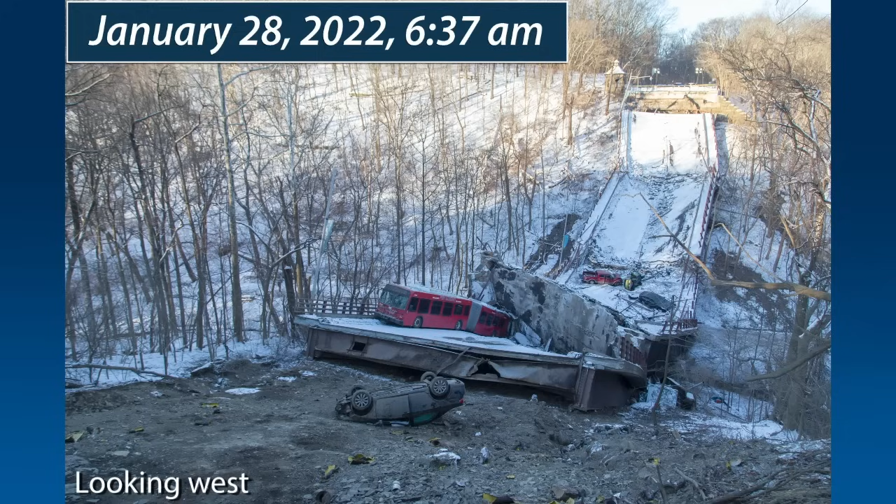On January 28, 2022, about 6:37 a.m. Eastern Standard Time, the Fern Hollow Bridge in Pittsburgh, Allegheny County, Pennsylvania, collapsed. At the time of the collapse, there were 4 passenger vehicles and an articulated bus on the bridge. A 5th passenger vehicle drove off the east bridge abutment after the collapse began and came to rest on its roof. 4 people were injured and there were no fatalities.

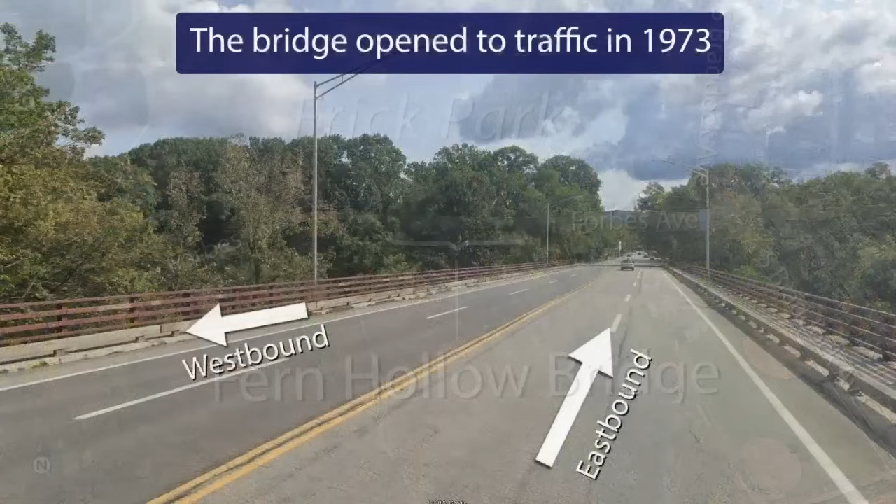The bridge, which was located about 5 miles east of downtown Pittsburgh, ran east and west and carried Forbes Avenue traffic over Frick Park. The bridge opened in 1973 with 2 lanes of traffic in each direction.

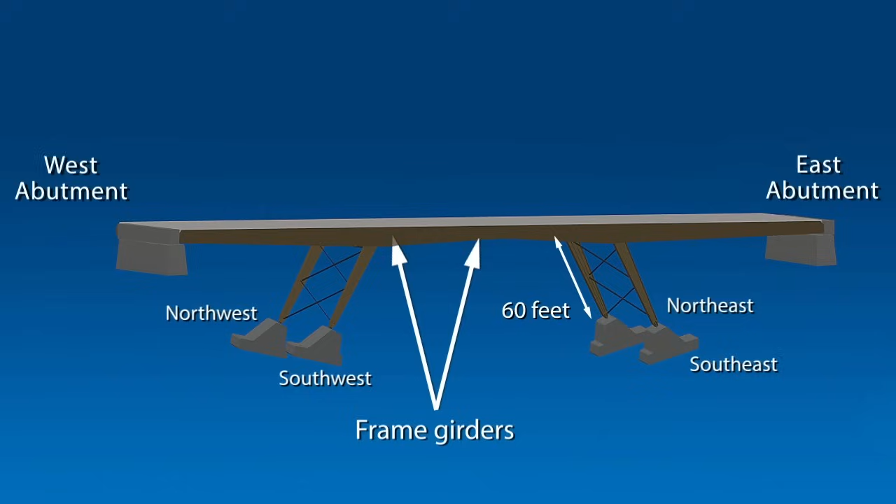The bridge was 447 feet long, and the main bridge structure consisted of 2 large girders, called frame girders, running east and west, supported by 4 rigidly connected legs, and abutments at the east and west ends. Each leg was about 60 feet long and oriented at an angle with respect to the frame girders. Each pair of adjacent legs were connected by cross bracing. This design is referred to as a K-frame due to the way the frame girders and legs form a shape similar to an elongated K when placed on its side.

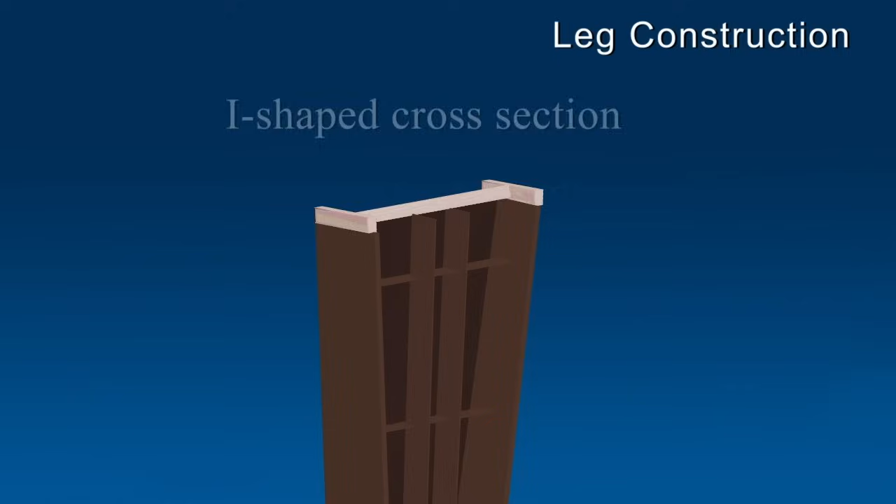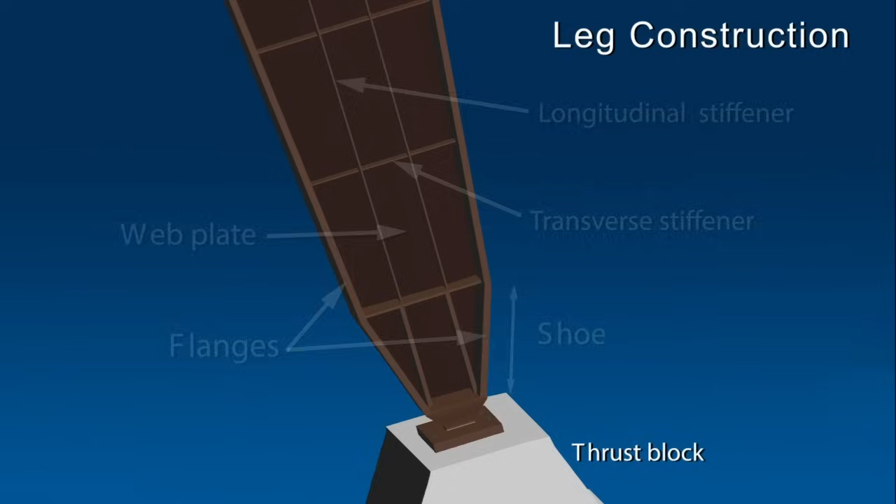Each leg was constructed of welded steel plates forming an I-shaped cross section. The 2 flanges were the main load-carrying parts of the leg. Each leg narrowed from top to bottom and then tapered to a shoe that rested on a reinforced concrete thrust block. On the inside of each leg, longitudinal and transverse stiffeners were welded to the web and flanges to resist buckling. The outward sides of the legs did not have these stiffeners, but, like the insides of the legs, included a transverse tie plate and longitudinal bearing stiffeners running the length of the shoe.

The tapered legs cause compression forces in the flanges to push outward. This outward push was resisted by the transverse tie plate and the web at the top of the shoe, which placed the transverse tie plates in tension. By design, the transverse tie plates were thicker than the transverse leg stiffeners to carry the forces at this critical location in the leg.

The bridge was constructed of uncoated weathering steel, an alloy designed to form a protective surface layer of rust called a patina. The patina develops over time through repeated wet-dry cycles. Because a properly formed patina resists corrosion, using this material eliminated the need for painting or coating.

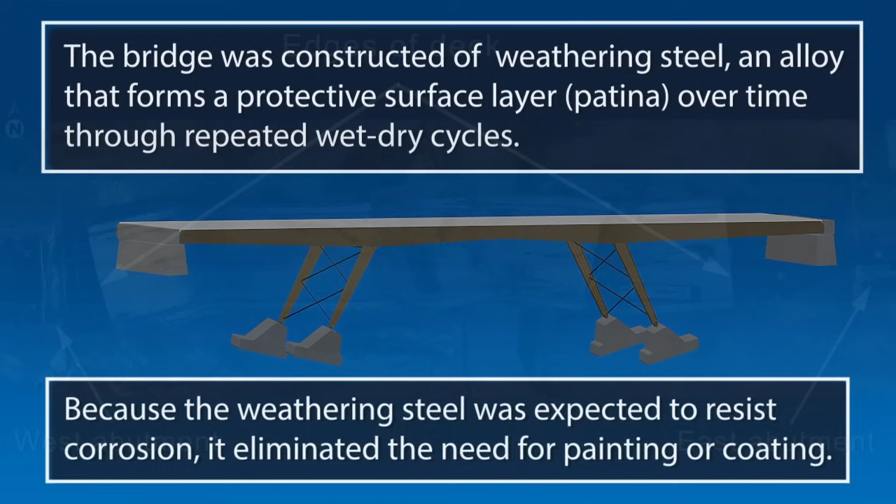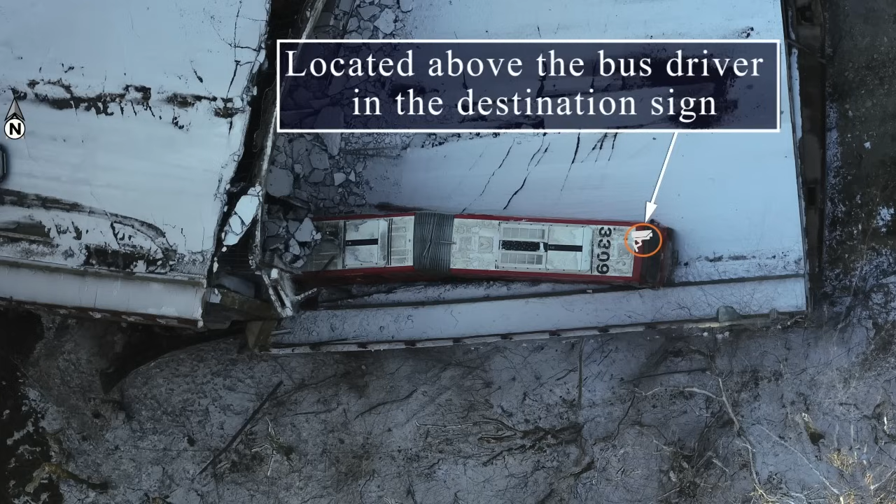This is an overhead view of the bridge taken shortly after it collapsed. A Port Authority articulated transit bus was traveling from west to east on the bridge prior to the collapse. It was equipped with video cameras, including one facing forward at the front of the bus and one facing rearward along the right side of the bus.

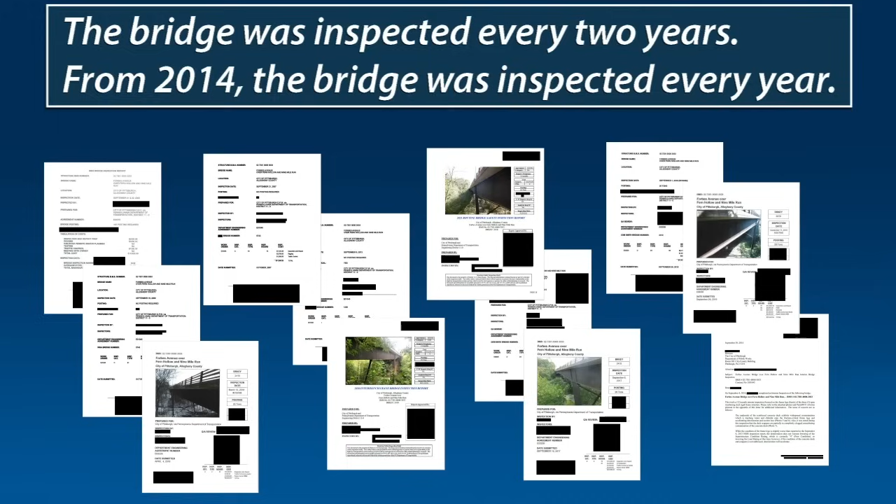The Fern Hollow Bridge was inspected every 2 years in compliance with the National Bridge Inspection Standards. Starting in 2014, the Pennsylvania Department of Transportation required the bridge be inspected every year due to its condition rating and 26-ton weight restriction, also known as a posted load limit.

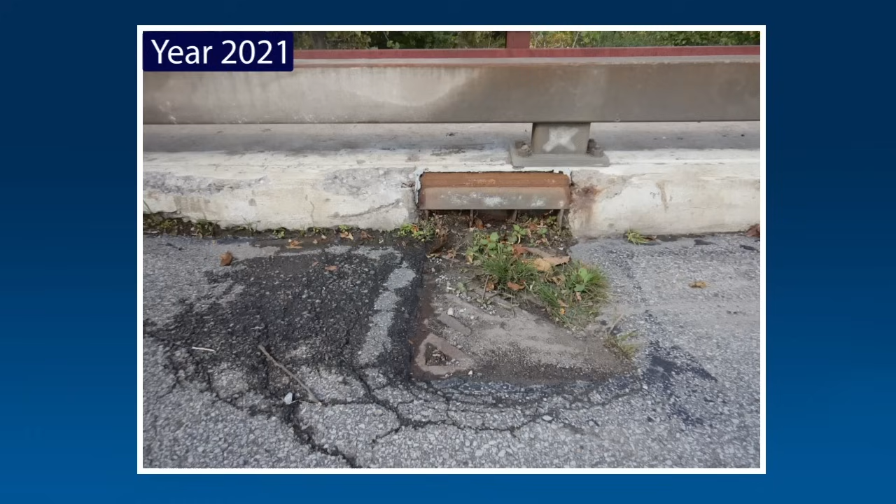Inspection reports over the years repeatedly documented clogged drains in areas where leaves or other debris collected, allowing water and road salts to run down the bridge legs and accumulate on the legs near the transverse tie plates. This accumulation of water and debris on the bridge legs prevented these areas from drying, which, in turn, prevented the protective patina from forming on the uncoated weathering steel.

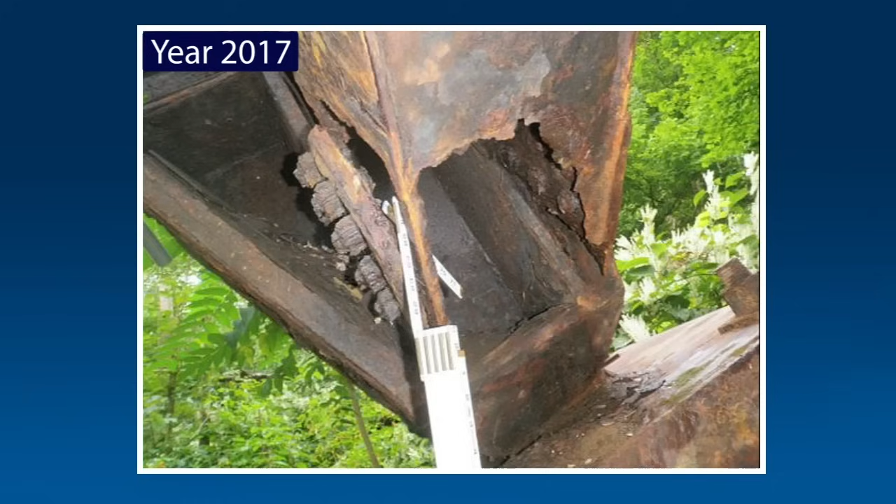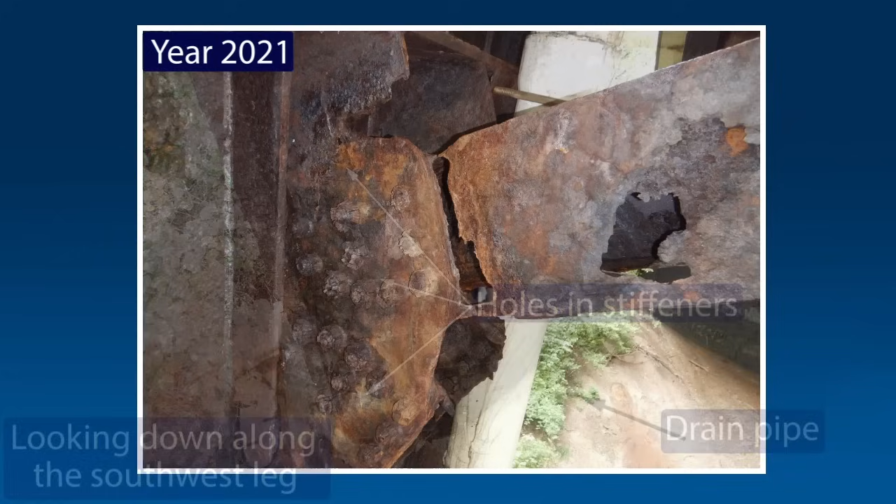This lack of patina and a continued accumulation of water and debris ultimately led to extensive corrosion damage and loss of material, or section loss, on critical areas of the bridge legs, including the transverse tie plates. The inspection reports documented some of this section loss, which progressed to the point that there was thinning of and holes through numerous structural elements on all 4 legs.

In 2009, due to corrosion of the leg's cross-bracing, steel cables were added to both sides of the bridge legs, connecting the top of one leg with the bottom of the other leg, forming an X. The cables were intended to be a temporary measure until the rigid cross-bracing could be replaced with new cross-bracing of the same kind. This was never completed.

Similarly, a rust-inhibiting coating was to be applied to the bridge legs and lower bracing members, but this was also not completed.

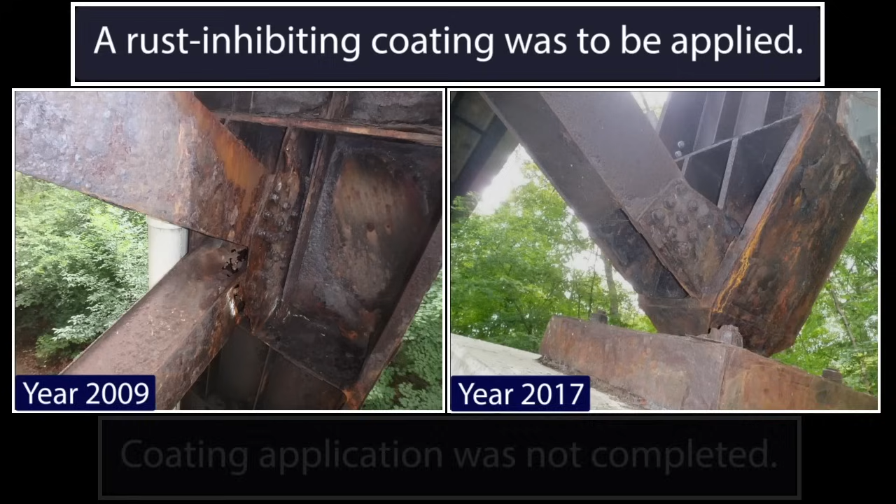Post-collapse examination revealed that while all 4 legs sustained damage, the southwest leg sustained the most damage, including significant fracturing and deformation. On the southwest leg, both the web and transverse tie plate were severely corroded. The thickness of the transverse tie plate was substantially reduced near the hole in the web.

These 2 images, taken from inspection reports, show the same hole in the southwest leg in 2013 and 2021. In 2021, the hole in the web above the tie plate was visibly larger than it was in 2013.

Following the collapse, 3-dimensional scanning was used to document section loss on the legs of the bridge. These scanned images confirmed the reduced thickness of the southwest leg and transverse tie plate as shown in the photos. The yellow areas indicate where the steel was only 25% of its original thickness.

During the collapse, the bottom flange, highlighted in blue, separated from the web and the transverse tie plate, and the flange curled back onto itself as shown here. The bottom of the leg also bent approximately 90 degrees, changing the orientation of the shoe. While these deformations are being shown separately for illustrative purposes, they would have occurred simultaneously during the collapse of the bridge.

At the time of the collapse, it was dark and the temperature was 26 degrees Fahrenheit with light snow. All injured occupants had been transported from the scene by 8:26 a.m. A 16-inch gas main was severed during the collapse, but no fire or explosion occurred. Staff believes the emergency response to have been timely and effective and has excluded it as a factor.

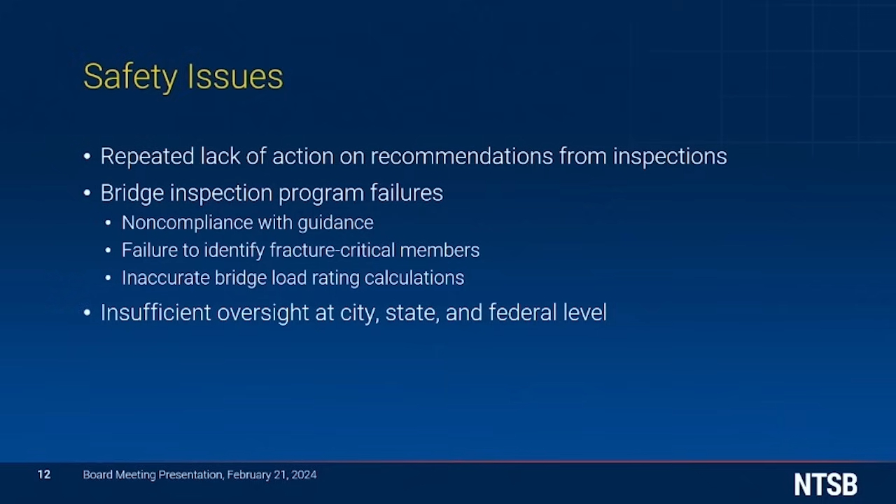Staff identified several safety issues during the investigation: the repeated lack of action on recommendations from the inspections of the Fern Hollow Bridge at multiple levels; failures in the bridge inspection program, which was non-compliant with federal and industry guidance, did not identify all the fracture-critical members of the Fern Hollow Bridge, as well as producing inaccurate load calculations. And finally, insufficient oversight of the bridge inspection program at the city, state, and federal level.

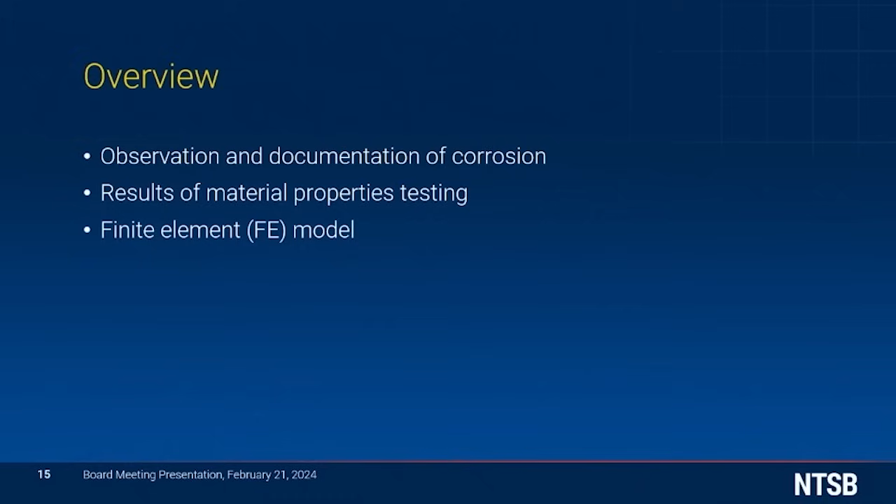In my presentation today, I will review the corrosion observed on the bridge components post-collapse, the results of testing of the steel used in the construction of the bridge, and the conclusions drawn from finite element modeling of the bridge design.

The Fern Hollow Bridge was constructed from a grade of steel called uncoated weathering steel. Uncoated weathering steel, or UWS, is a high-strength, low-alloy steel developed at the beginning of the 20th century and used commercially for over 60 years.

UWS was designed for structural use without the need to use paint for environmental protection. This is because, under appropriate wet-dry cycling conditions, UWS develops a stable oxide called a patina. The elimination of painting makes UWS more cost-effective, but still requires maintenance to ensure the wet-dry cycles are achieved and corrosion is prevented.

The proper use of uncoated weathering steel has been addressed by the Federal Highway Administration for many years, including a 1989 technical advisory that was highlighted in their May 2023 response to the NTSB interim recommendation. Additionally, thorough guidance has been provided in a 2022 report published jointly by the National Steel Bridge Alliance and American Institute of Steel Construction. Corrosion is an issue addressed at length in that report, including ways to prevent it and how to inspect UWS for its presence.

Extensive corrosion with accompanying section loss was observed on all 4 legs of the Fern Hollow Bridge. Section loss refers to reduction of component thickness due to corrosion, with a hole demonstrating an area with 100% section loss. The corrosion was particularly concentrated in the shoe at the bottom of the legs, as can be seen in the photos shown here.

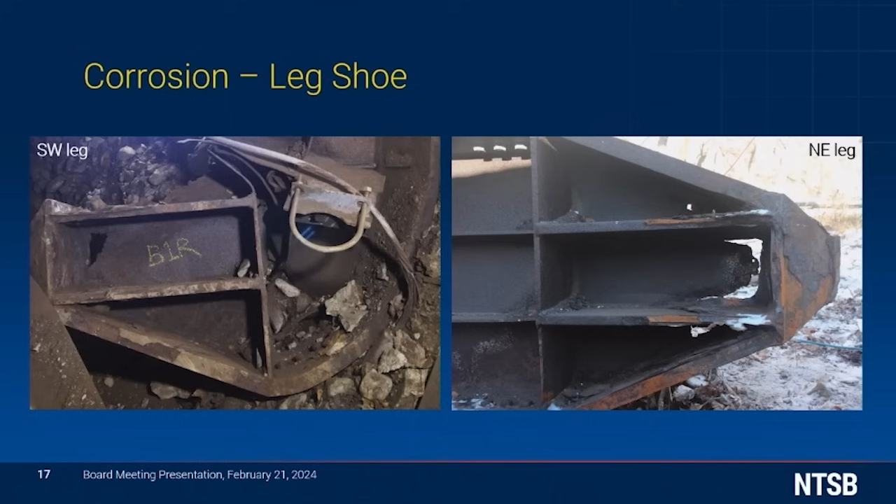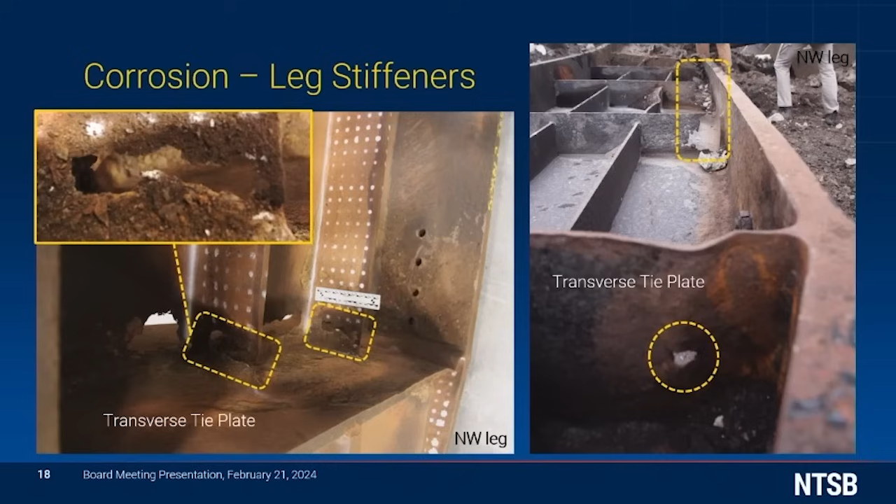Evidence of corrosion was also observed in the leg stiffeners. Longitudinal stiffeners had holes in areas where debris collected at the bottom of the legs, as shown in the photos on the left. Transverse stiffeners had holes along the drainage path from the deck, indicated in the top of the photo on the right. These holes were in line with thinning of and holes in the transverse tie plates, as indicated in the bottom of the right photo.

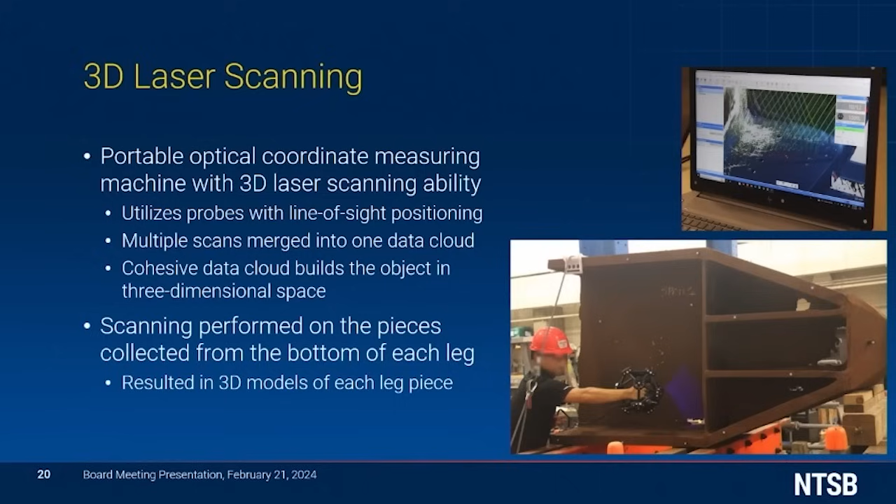To document the extensive corrosion observed, 3D laser scanning was performed on the bottoms of the bridge legs, which had been collected while investigators were on scene. The process merged multiple line-of-sight laser scans into one cohesive point cloud, resulting in 3-dimensional models of each leg piece. The models could be reoriented, enlarged, sectioned, and measured for further analysis.

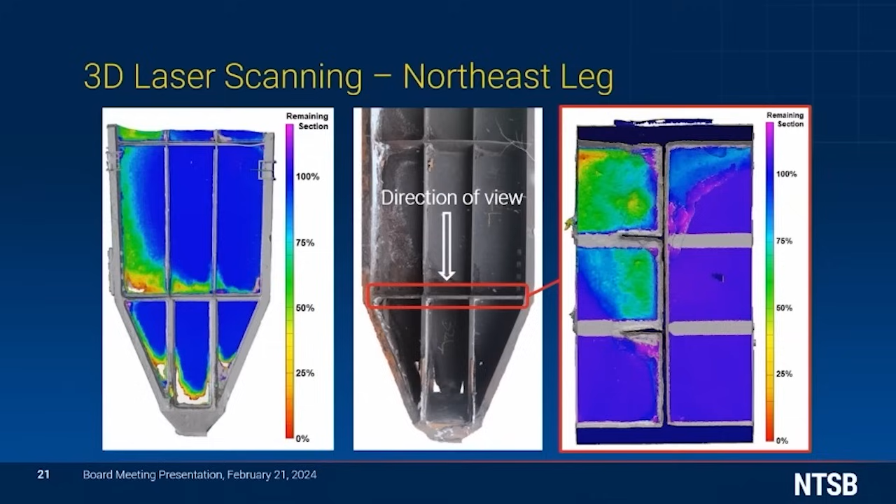A view displaying the transverse tie plate thickness shows that it also had 50% section loss near the holes in the web.

Design plans for the Fern Hollow Bridge called for the use of uncoated weathering steel that met ASTM specification A588. 26 plates of steel were purchased from 2 different steel mills. Mill test reports, or MTRs, provided by the steel mills listed the tensile strength, impact strength, and chemistry for each plate sourced. The individual plates were matched with material collected on scene, then tested and compared to the applicable MTRs.

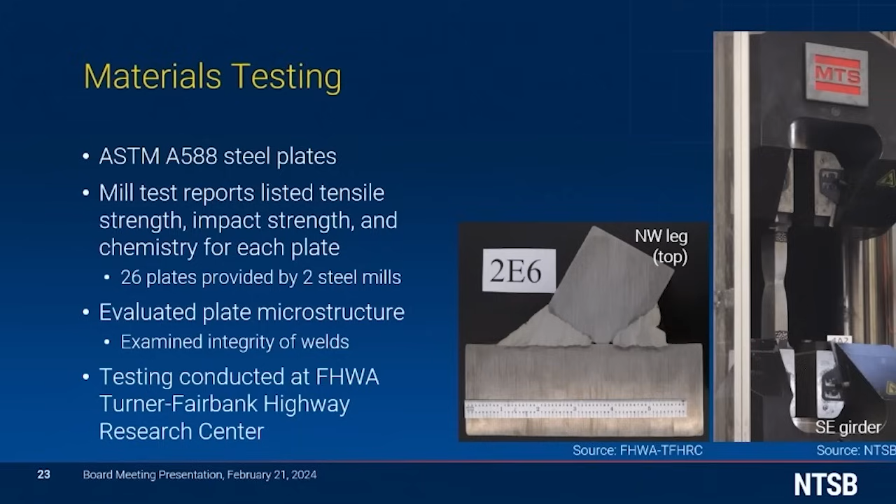In addition, cross sections were prepared so plate microstructure and weld integrity could be examined. All testing was performed at FHWA's Turner Fairbank Highway Research Center.

A few plates located in the girders, away from the collapse initiation at the bottom of the legs, were slightly below tensile strength, though all plates met impact strength requirements. Several plates had non-conformant chemistry and were subsequently analyzed for any effect on corrosion resistance. That analysis determined the desired protective patina could still have formed under appropriate conditions on all plates.

The plate's microstructure appeared as expected, while cross-sections through welds showed some lack of fusion and evidence of section loss due to corrosion. Several welds also had cracks, but none were consistent with fatigue cracking.

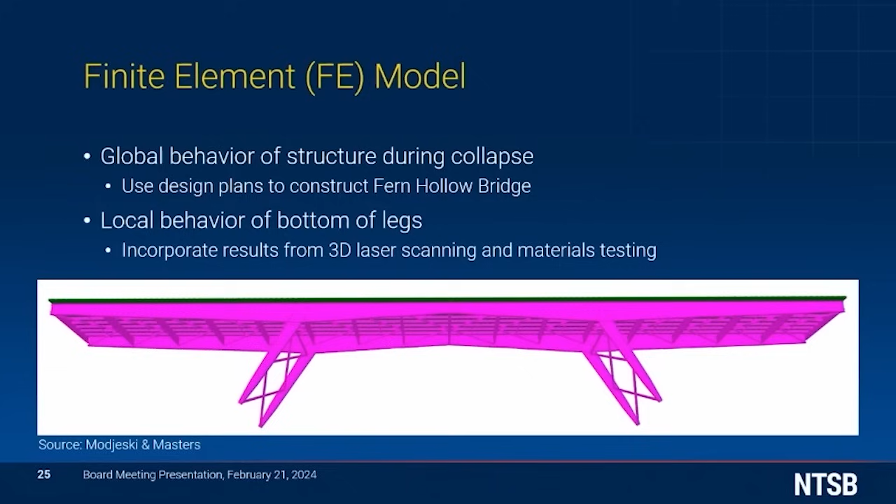A finite element model, or FE model, was developed to analyze the collapse of the Fern Hollow Bridge. The FE model simulated the collapse sequence and examined performance of the bridge legs. The overall global model was constructed using the design plans. The specific local behavior at the bottom of the legs was further refined by incorporating 3D laser scans of the section loss and the results of material properties testing.

The global model showed that the as-designed Fern Hollow Bridge could support the demand from both the dead load of the bridge itself and live load from traffic, which indicated the bridge design was adequate for its intended use. However, at the bottom of the legs, incorporation of the section loss present at the time of the collapse resulted in a transverse tie plate with decreased capacity that could no longer carry the necessary demands of the bridge.

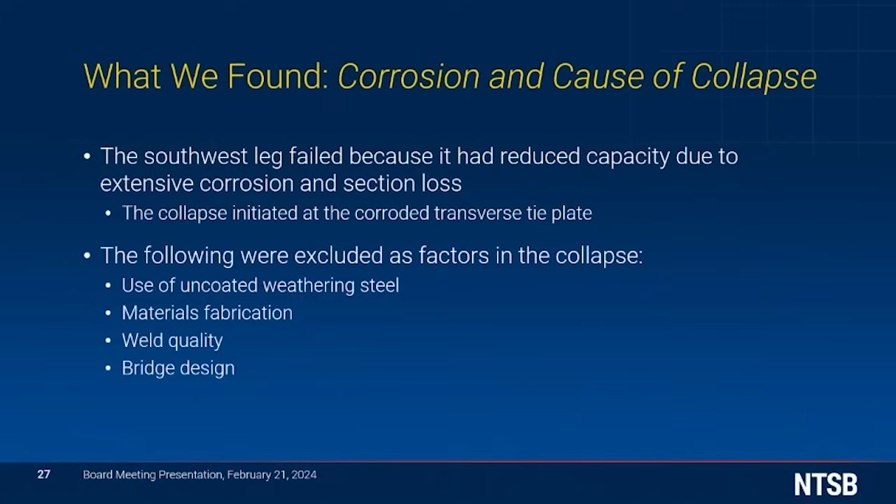In summary, there were numerous signs of extensive corrosion on the bridge legs, including substantial section loss of the transverse tie plates that reduced their structural capacity. Therefore, staff concluded that the corrosion-induced failure of the transverse tie plate on the southwest leg caused the collapse of the Fern Hollow Bridge. Additionally, staff excluded the use of uncoated weathering steel, the fabrication of the materials, and the welds used in the construction of the bridge, and the bridge design as factors in the collapse.

This concludes my presentation. Next, Mr. Steve Prouty will discuss bridge inspections.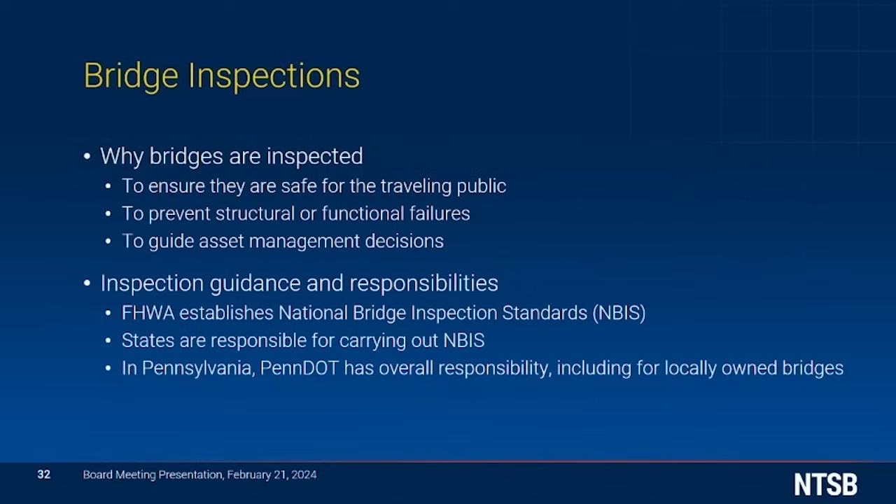If a city, county, or township owns a bridge, that municipality is responsible for its inspection.

A key term that I will use is fracture critical member, or FCM. A fracture critical member is a bridge component that meets the following three criteria: it is made of steel, it is fully or partially in tension, and the failure of that member will cause the bridge to partially or fully collapse. In the 2022 update to the NBIS, the term fracture critical member was renamed non-redundant steel tension member, or NSTM.

As the owner of the Fern Hollow Bridge, the City of Pittsburgh was responsible for making sure it was inspected as required by the NBIS and was also responsible for its maintenance.

The Fern Hollow Bridge was subject to two types of inspections: routine inspections and interim fracture critical member inspections. Routine inspections are regularly scheduled inspections that consist of examining and documenting the condition of the bridge and identifying any changes from previous inspections. Fracture critical member inspections involve a hands-on inspection of fracture critical members or member components and may include visual and other non-destructive evaluations.

Investigators reviewed all the inspection reports for the Fern Hollow Bridge from 2005 until the time of the collapse. The routine inspections were performed every 2 years and included a fracture critical member inspection as part of the routine inspection. Beginning in September 2014, the Fern Hollow Bridge was also subject to interim fracture critical member inspections performed in the years between the routine inspections, reducing the time between FCM inspections to 1 year.

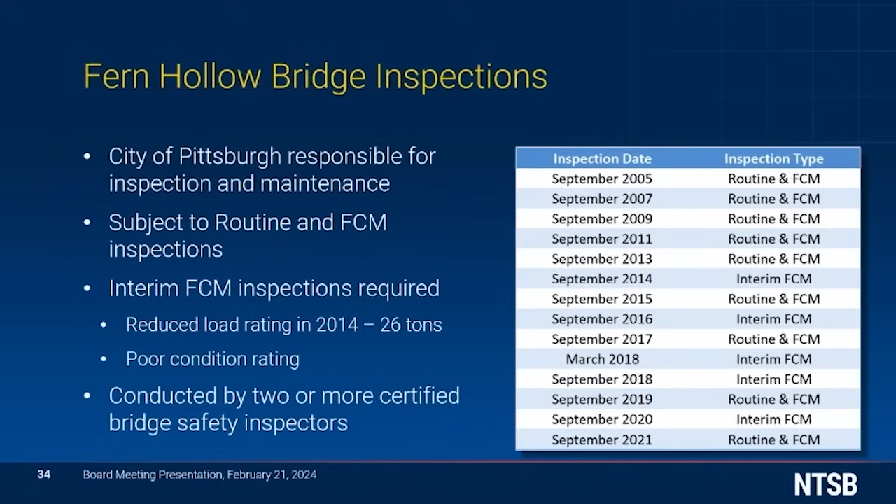Each inspection of the Fern Hollow Bridge was carried out by a team of at least 2 certified bridge safety inspectors, one of which was designated as the team leader and is responsible for planning, performing, and reporting on the findings of the inspections. All inspectors of the Fern Hollow Bridge met both federal and PennDOT requirements.

In accordance with PennDOT's bridge inspection guidelines, when inspectors found an item needing repairs, a maintenance priority code was assigned, ranging from priority code 0, which required an immediate response within 7 days, to priority code 5, which allows the work to be completed according to the existing maintenance schedule or within the next work cycle.

Now that we've talked about the inspection process, let's discuss some of the findings and maintenance recommendations made in the Fern Hollow Bridge inspection reports.

In our review of the inspection reports, we found numerous inspection findings that were, with few exceptions, documented year after year. The inspection reports also contained maintenance recommendations, many of which were repeated nearly every year.

For example, these photographs show the clogged drainage inlets on the bridge deck. Despite maintenance recommendations being repeatedly issued to the City of Pittsburgh, nearly every routine inspection found the drains on the deck to be partially or fully clogged.

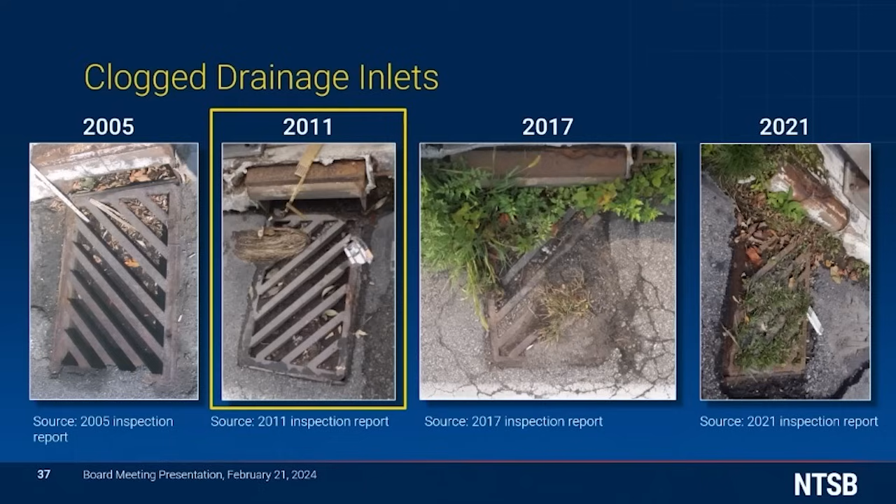The one exception is that the 2009 inspection found that the drains had been cleaned that year and were clear at the time of the inspection. But just 2 years later, in 2011, the drainage inlets were found to be clogged again.

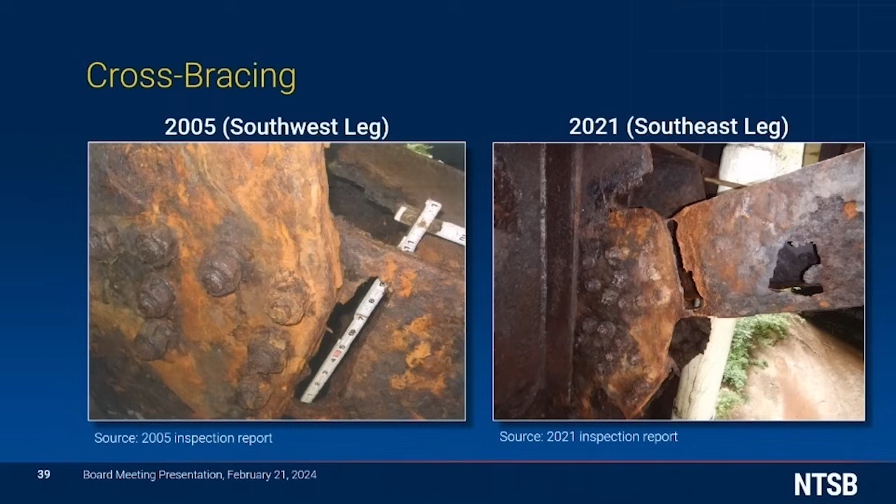Our last example shows the corrosion and section loss on the cross bracing, which was noted in every inspection report from 2005 through 2021. While none of the cross braces were ever repaired, the lower cross brace at the west end of the bridge was removed in 2018 and will be discussed in greater detail by Mr. Walsh.

As a result of the investigation, we found significant corrosion and section loss on the bridge, particularly the southwest leg. Maintenance and repair recommendations were repeatedly made to the City of Pittsburgh, however, they failed to act on them. This led to progressive deterioration and the structural failure of the bridge.

Given the condition of the Fern Hollow Bridge at the time of the collapse, investigators felt it was important to issue an interim safety recommendation.

As a result, the NTSB issued a safety recommendation report in May of 2023. The report contains safety recommendation H-23-13, issued to the Federal Highway Administration to develop a risk-based, data-driven process to identify, prioritize, and perform any incomplete follow-up actions on bridges with uncoated weathering steel components.

On July 19, 2023, in response to the NTSB recommendation, the FHWA published a memorandum instructing all state departments of transportation and other bridge owners to identify bridges with uncoated weathering steel components in the primary load path and ensure that maintenance items which address deficiencies resulting from poor uncoated weathering steel performance are completed.

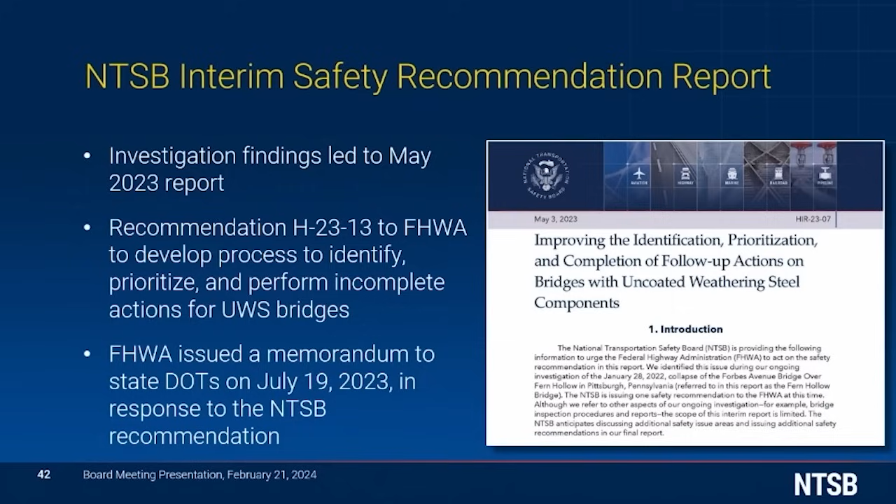Additionally, the states are to verify that the current load rating for the bridges are adequate.

The FHWA's response to identify bridges with uncoated weathering steel components and to ensure follow-up actions are performed on these bridges meets the intent of the NTSB's safety recommendation. Staff proposes that safety recommendation H-23-13 be classified closed acceptable action.

We will now discuss the quality of the Fern Hollow Bridge inspections, shortcomings identified in the inspections, and failures in the inspection program.

Guidance on performing bridge inspections can be found in the Bridge Inspector's Reference Manual, referred to as the BIRM, which is published by the FHWA, and in the Manual for Bridge Evaluation, or MBE, which is published by the American Association of State Highway and Transportation Officials, or AASHTO. The MBE is incorporated by reference into the federal regulations.

Several quality issues were identified within the Fern Hollow Bridge inspection reports. First, during a bridge inspection, where possible, corroded material is supposed to be removed and measurements are to be taken on bare metal. Photographs from the inspection reports, however, like this one from the 2015 report, show that corroded material was not always cleaned away.

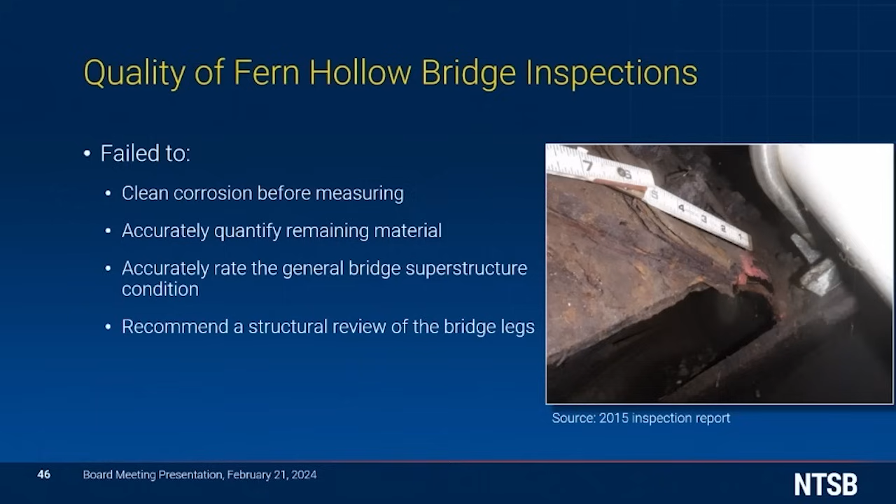And fourth, on the Fern Hollow Bridge, the condition state rating of all four legs was severe, which is the worst possible rating and calls for a structural review. No records were located to indicate that a structural review was conducted as a result of the severe condition rating, nor was any such recommendation made in the inspection reports.

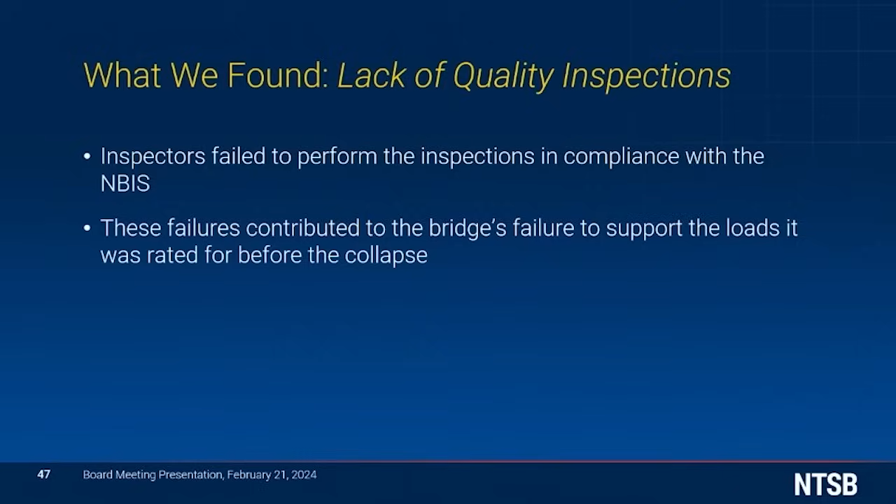Staff found that multiple inspectors failed to perform the inspections in compliance with the National Bridge Inspection Standards, and these failures contributed to the inability of the bridge to maintain its rated capacity.

We will now discuss errors and omissions found in the fracture critical member inspection plans for the Fern Hollow Bridge.

Under the NBIS, fracture critical member inspections are required to be conducted on all bridges that contain FCMs. FCM inspections are more rigorous than a routine inspection, as the inspection of bridges with fracture critical members are expected to identify defects that, if left unaddressed, could lead to the failure of those critical components as well as the bridge itself.

An FCM inspection requires a written and well-documented inspection plan to ensure that all fracture critical bridge elements or fracture critical members are identified in advance and that they are inspected properly and thoroughly during each FCM inspection. Additionally, FCM inspections are required to be conducted as a hands-on inspection, meaning that the inspector must be close enough to all parts of the FCMs to be able to reach out and touch any part of it as necessary. FCM inspections will often include the use of non-destructive evaluation methods to determine the presence and size of cracks or other defects that are difficult to see with the naked eye.

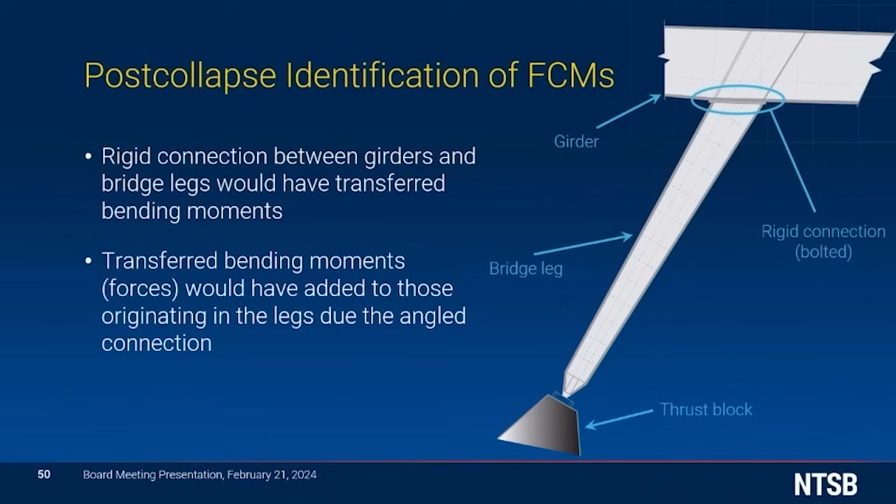Following the collapse, the NTSB and FHWA evaluated the design of the Fern Hollow Bridge to determine whether the rigidly connected frame legs were fracture critical members and therefore subject to the additional requirements of an FCM inspection. During the evaluation, we found that the rigid connection between the main girders and the frame legs would have allowed for the transfer of bending moments or forces from the girders into the legs, and this transfer of bending moments would have added to the bending moments originating in the legs due to their angled orientation.

Additionally, a table was included on the design plans for the Fern Hollow Bridge that indicated there would have been bending stresses transferred from the main girders to the rigidly connected frame legs as shown on the slide. This information should have been enough to prompt the structural engineers that were developing any fracture critical member inspection plans to perform an additional analysis to determine if any portions of the leg would be in tension.

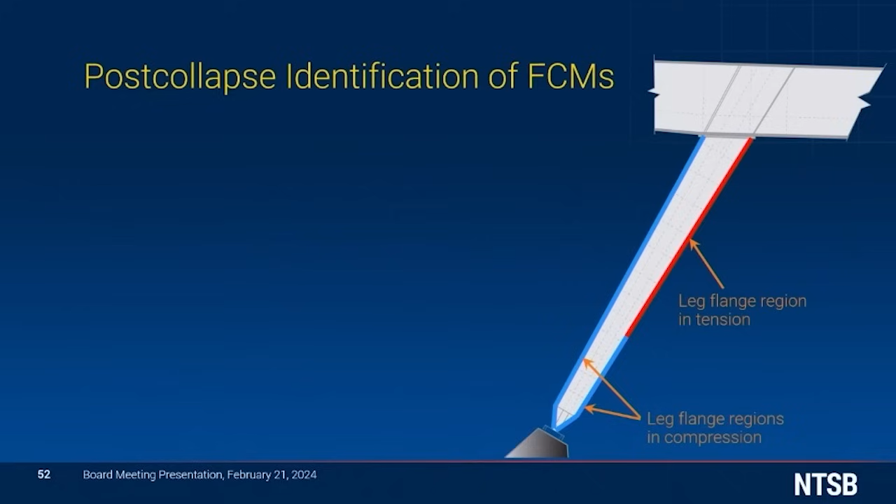The results of a post-collapse analysis was able to confirm the accuracy of the axial stress and maximum unit bending stress values for location G in the design plans. The analysis found that under the loads used in the design of the bridge, a portion of the leg's lower flange would have been in tension, as indicated by the red highlighted region in the diagram. The remainder of the flanges would have been in compression, as indicated by the blue highlighted regions.

Because the non-redundant steel frame legs contained areas that were in tension, the legs should have been designated as FCMs on the inspection plans, thereby subjecting them to the fracture critical member bridge inspection requirements.

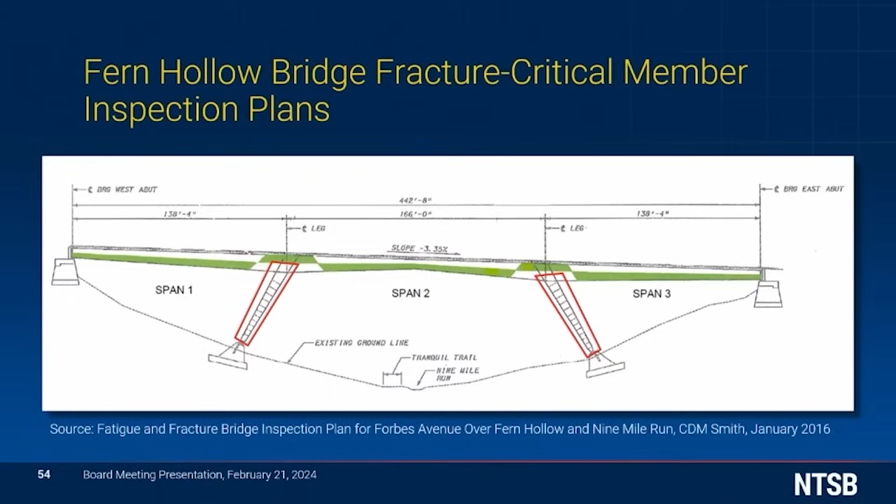As we just established, the frame legs were fracture critical members and should have been identified as such. The diagram shown here was taken from the most recent FCM inspection plan for the Fern Hollow Bridge, with the green highlighted areas indicating portions of the bridge that had been identified to contain fracture critical members. The frame legs, encircled in red, were not identified as being FCMs. In fact, none of the inspection reports or fracture critical member inspection plans generated for the Fern Hollow Bridge ever identified the frame legs as being fracture critical members.

As discussed earlier, PennDOT has established maintenance recommendation priority codes as a way of prioritizing the maintenance recommendations resulting from an inspection, as well as establishing a time frame within which repairs and other maintenance work is to be completed. This guidance also provides an example for assigning priority codes specific to severe corrosion on fracture critical members, and states that full thickness section loss or holes in a fracture critical member should result in a maintenance priority code of 0.

As a reminder, maintenance items with a priority code of 0 require a response within 7 days. Because the legs were not identified as fracture critical members, the most urgent priority code rating they received for the

full thickness section loss was a priority code of 2. As a result, staff found the following: the fracture critical bridge inspection plans did not properly identify the bridge legs as fracture critical members. As a result, the bridge legs did not undergo an in-depth hands-on inspection, nor were they assigned the most appropriate maintenance recommendation priority code.

Had the City of Pittsburgh repaired the legs, the collapse of the Fern Hollow Bridge could have been prevented. The correct identification of fracture critical members is crucial to ensuring that these members are properly maintained so that they do not fail and result in a partial or full bridge collapse.

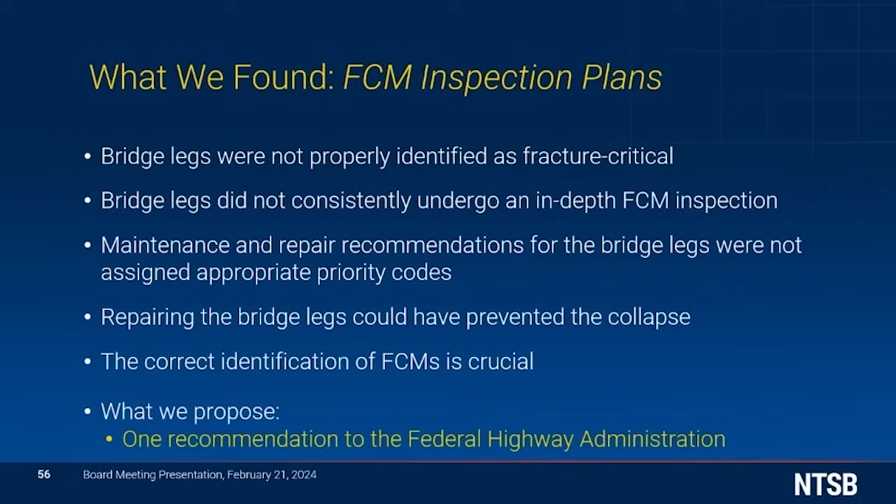For these reasons, one recommendation is proposed to the Federal Highway Administration to require state departments of transportation and other bridge owners to conduct a one-time review of existing fracture critical member inspection plans for bridges with non-redundant steel frame leg designs, to ensure that all fracture critical members are identified.

Finally, we will discuss the lack of guidance regarding the proper identification of fracture critical members. Except for the transverse tie plate and the web immediately adjacent to the tie plates, the bottom third of the legs, including the shoe, were mainly in compression.

The transverse tie plates at the top of the shoe were critical components in the structural stability of the legs, as well as the overall bridge, but were not identified as FCMs prior to the collapse, nor did inspectors recognize the failure risk when they documented the section loss to the transverse tie plates.

Neither the BIRM nor the MBE addressed the identification of bridge components in localized tension zones, such as the tie plate region of the Fern Hollow Bridge, especially for portions of bridges that are globally in compression. As a result, staff found that the lack of information on properly identifying localized tension zones in bridge inspection guidance materials may contribute to the failure of inspectors to correctly identify fracture critical members.

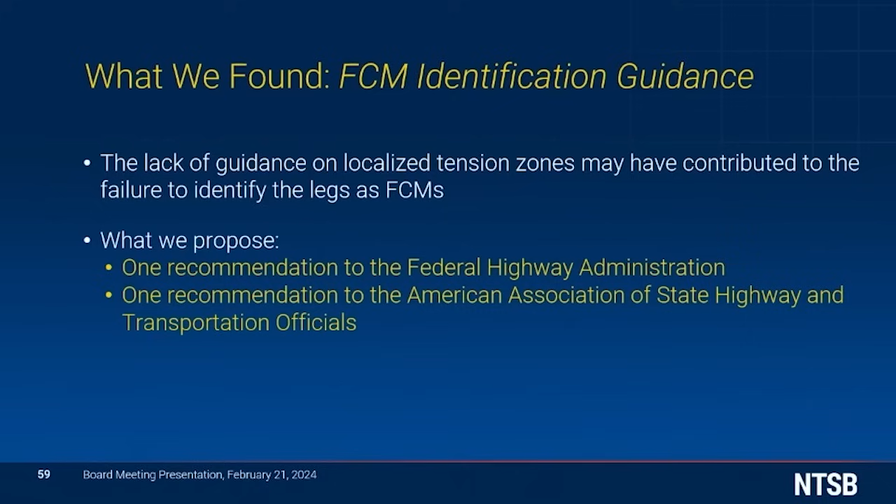For this reason, one recommendation is proposed to the Federal Highway Administration, and one recommendation is proposed to the American Association of State Highway and Transportation Officials, to include guidance in their manuals that addresses the identification of localized tension zones.

This concludes my presentation. Mr. Walsh will now discuss load ratings.

Good morning, Chair Homendy, Member Graham, and Member Chapman. My presentation discusses several failures that allowed the Fern Hollow Bridge to remain open when its conditions dictated that it should have been closed. I will be discussing the failure to perform an adequate bridge load rating, the failure to measure an accurate asphalt wearing surface thickness on the bridge, and the insufficient oversight by the City of Pittsburgh, Pennsylvania Department of Transportation, and the Federal Highway Administration regarding bridge inspections.

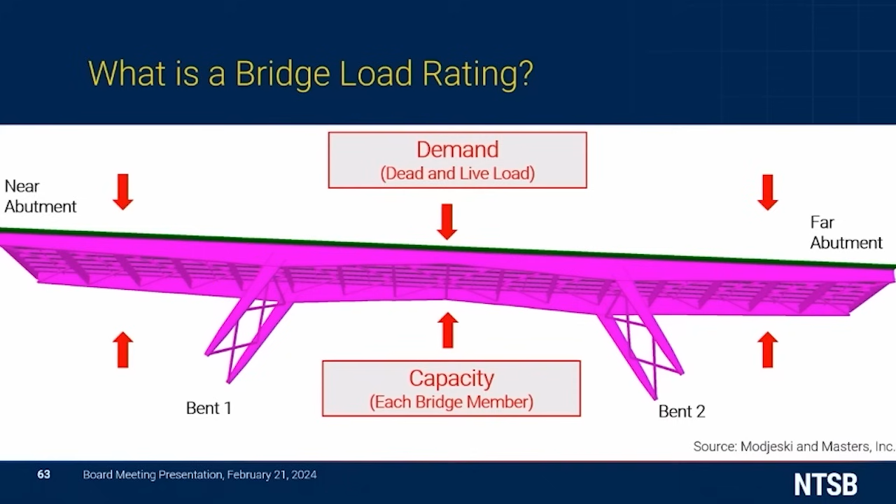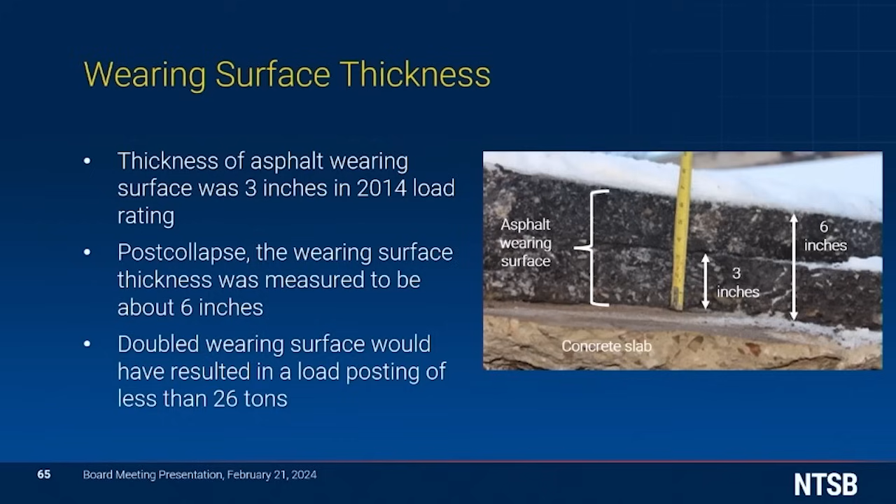First, the thickness of the asphalt wearing surface was assumed to be 3 inches, consistent with the design plans. Post-collapse, the wearing surface thickness was measured to be about 6 inches as shown in the figure to the right. The doubled wearing surface thickness would have resulted in a load posting less than 26 tons if the thicker surface had been included in the load rating.

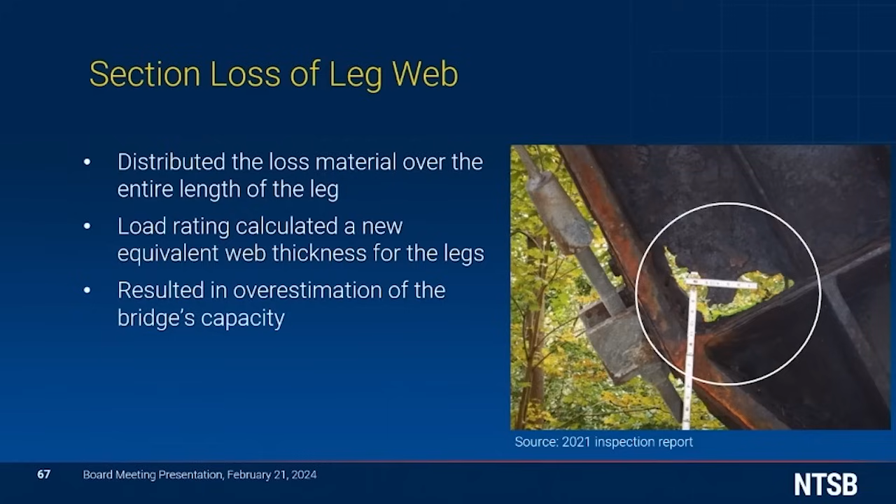Third, the load rating analysis took the section loss at critical areas of the leg web, such as the inward facing of the southwest leg as shown in the figure to the right, and distributed the lost material over the entire length of the leg. In doing so, the load rating calculated a new equivalent web thickness for the legs as a whole, but failed to account for potential localized failures. Distributing the section loss over the entire leg length resulted in overestimating of the bridge's capacity.

Staff found the calculations and assumptions used in the 2014 load rating analysis overestimated the Fern Hollow Bridge's capacity, and had the correct calculations and assumptions been used, the bridge would have been closed.

Measuring accurate wearing surfaces on a bridge is important because it affects the estimation of the dead load, which in turn affects the load rating analysis. As mentioned previously, the actual asphalt thickness was nearly double the 3 inches specified in the design plan and assumed in the 2014 load rating.

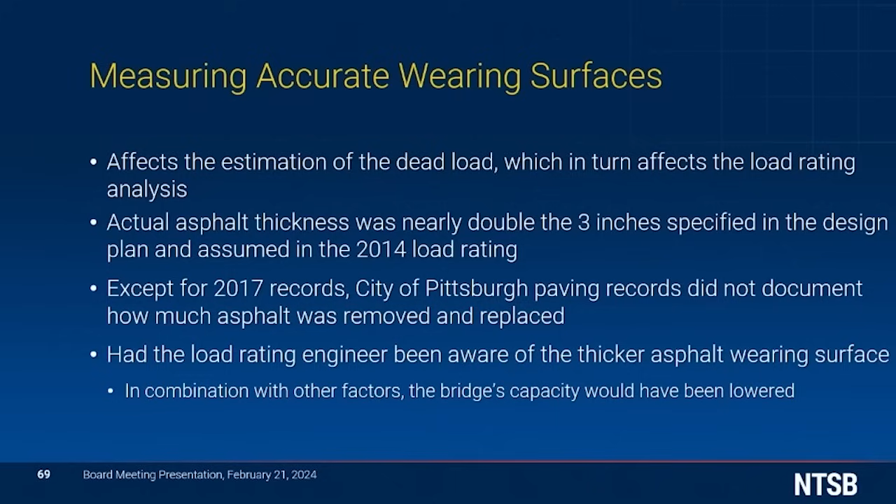Except for the 2017 records, City of Pittsburgh paving records did not document how much asphalt was removed and replaced. Had the load rating engineer been aware of the thicker asphalt wearing surface in combination with other factors, the bridge's capacity would have been lowered.

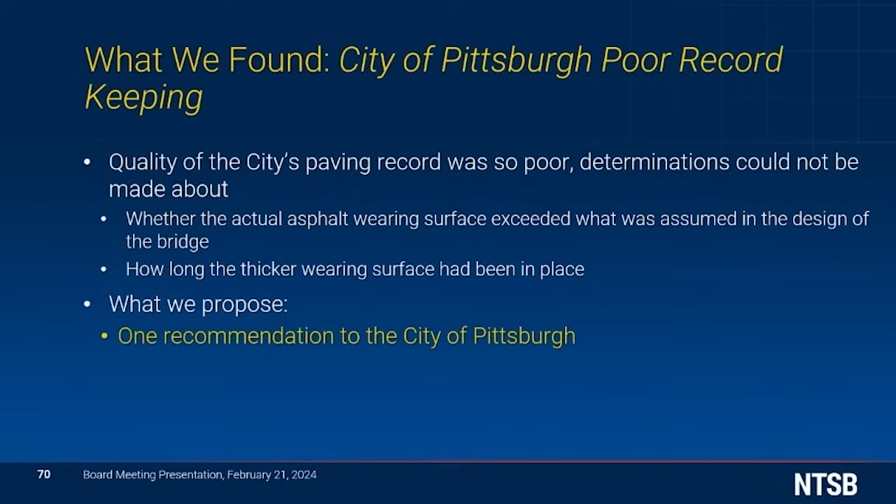Staff found that the quality of the city's paving records was so poor that determinations could not be made about whether the actual asphalt wearing surface exceeded what was assumed in the design of the bridge, or about how long the thicker wearing surface had been in place. For this reason, one recommendation is proposed to the City of Pittsburgh to establish a system to ensure that its paving record-keeping practices are up to date.

Other commonly used methods include measuring the curb height and comparing the measurement to design plans, or driving a nail into the asphalt and measuring the visible part of the nail. These methods also have drawbacks, including differences in thicknesses across the bridge and the nail hitting aggregate, providing a false measurement.

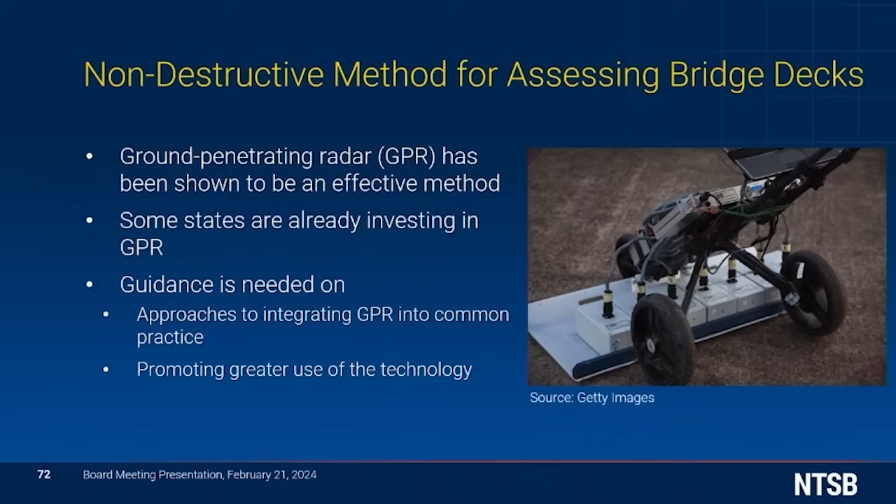A non-destructive method for assessing bridge decks includes ground penetrating radar, or GPR. GPR has been shown to be an effective method to assess the thickness of pavement layers, including asphalt, as shown in the portable GPR machine to the right. Some states are already investing in GPR as a means of moving away from coring. Guidance is needed on approaches to integrating GPR into common practice and promoting greater use of the technology.

Staff found that guidance is needed on the use of non-destructive techniques to verify the actual thickness of the bridge wearing surface. For this reason, one recommendation is proposed to the Federal Highway Administration to update the Bridge Inspector's Reference Manual, and one recommendation is proposed to the American Association of State Highway and Transportation Officials to update the Manual for Bridge Evaluation.

I will now discuss the insufficient oversight by the agencies involved in performing and ensuring compliance with the Fern Hollow Bridge inspections. The City of Pittsburgh was responsible for inspecting and maintaining the Fern Hollow Bridge. Similar maintenance and repair recommendations were made in the inspection reports for more than 15 years leading up to the collapse, but the city failed to act on them, resulting in progressive corrosion to the point of failure.

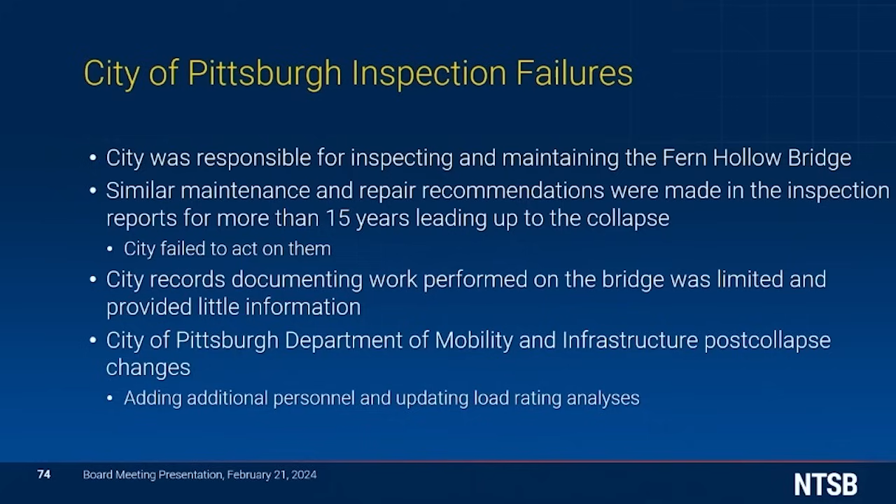City records documenting work performed on the bridge was limited, and those that were available, such as paving records, provided little information. Following the bridge collapse, the City of Pittsburgh Department of Mobility and Infrastructure introduced several changes to its processes to improve management and oversight of city-owned bridges, including adding additional personnel and updating load rating analyses so that all vehicular bridges in the city have a current load rating.

Staff found that the post-collapse actions completed by the City of Pittsburgh in response to the collapse of the Fern Hollow Bridge have the potential to address the deficiencies found in this investigation. For this reason, one recommendation is proposed to the City of Pittsburgh, and one recommendation is proposed to the Pennsylvania Department of Transportation to collaborate, and for PennDOT to take the lead in evaluating the effectiveness of the changes made by the city following the collapse of the Fern Hollow Bridge.

PennDOT is responsible for ensuring that bridges in Pennsylvania are inspected in compliance with the National Bridge Inspection Standards, or NBIS. Although the Fern Hollow Bridge was inspected in a timely manner, the investigation of the collapse revealed that inspections were not performed in compliance with the NBIS.

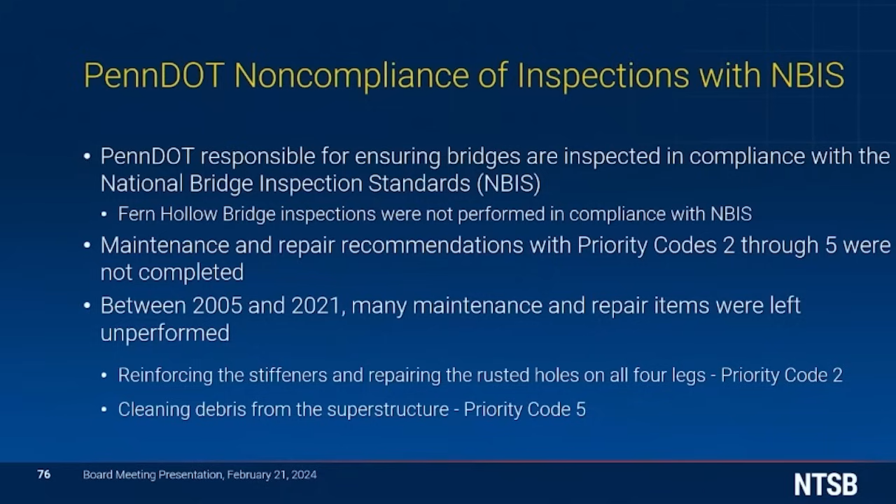The Fern Hollow Bridge collapsed because maintenance and repair recommendations with priority codes 2 through 5 were not completed. Between 2005 and 2021, many maintenance and repair items were left unperformed, including reinforcing the stiffeners and repairing the rusted holes on all 4 legs, designated a priority code 2, and cleaning debris from the superstructure, designated a priority code 5.

Post-collapse actions taken by PennDOT include updating its technical bulletin to ensure priority 2 maintenance needs are correctly classified and drainage systems are operating properly. PennDOT has taken steps to improve the inspection process and identify bridges in need of maintenance. However, it is critical not only that the maintenance and repair recommendations identified as priority 2 through 5 are appropriately coded, but action is taken in a timely manner to address the recommendations.

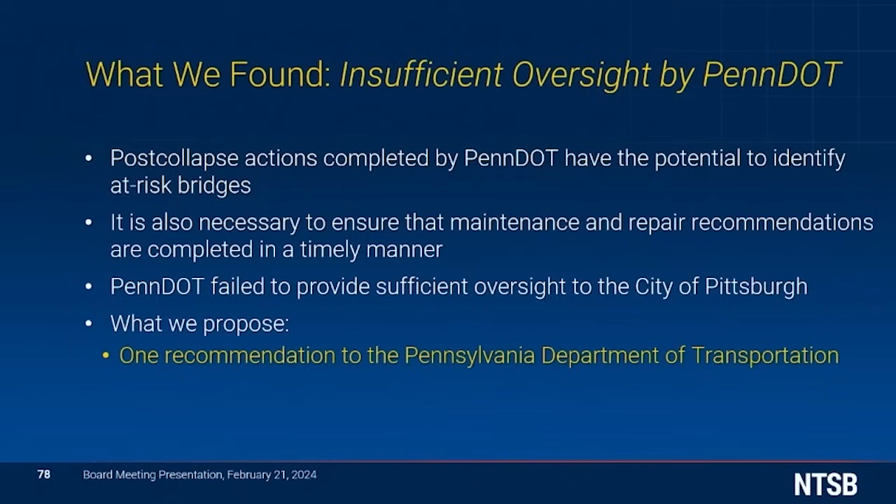Staff found that the post-collapse actions completed by PennDOT have the potential to identify at-risk bridges throughout the state. However, it is necessary to ensure that maintenance and repair recommendations are completed in a timely manner. Staff also found that PennDOT failed to provide sufficient oversight to the city of Pittsburgh. For this reason, one recommendation is proposed to the Pennsylvania Department of Transportation to develop and implement a plan to publish yearly aggregate data on bridge maintenance and repair recommendations.

FHWA monitors the compliance of each state's bridge safety inspection programs by evaluating 23 metrics that correspond to the NBIS. To evaluate the metrics, the FHWA assigns a compliance level. There are 4 compliance levels: compliant, substantially compliant, non-compliant, and conditionally compliant. The specific measures and thresholds for each compliance level are identified in each metric.

The selection of bridges is based on a random sample using FHWA's sampling tool. It is assumed that the sample of bridges is statistically representative of the overall population of bridges. FHWA uses a data-driven system to thoroughly investigate issues identified through these samples. There are more than 615,000 bridges listed in the National Bridge Inventory, or NBI database, of which 23,257 bridges are listed in Pennsylvania.

Targeted data-driven reviews can be an efficient way for FHWA to investigate bridge safety issues such as those identified in the Fern Hollow Bridge investigation. Targeted data-driven reviews can include evaluating the need to conduct new load ratings of bridges with advanced deterioration and evaluating whether the assumptions and methods used in the load rating calculations are correct.

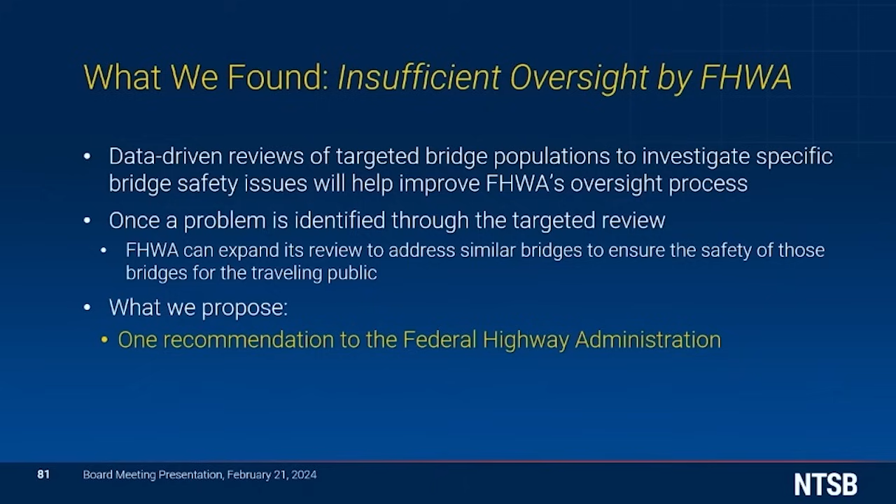Staff found data-driven reviews of targeted bridge populations to investigate specific bridge safety issues will help improve FHWA's oversight process. Once a problem is identified through the targeted review, FHWA can expand its review to address similar bridges to ensure the safety of those bridges for the traveling public. For this reason, one recommendation is proposed to the Federal Highway Administration to establish a process for conducting targeted reviews of the safety issues identified in this investigation.

Sharing of lessons learned of the failures of the inspection program that contributed to the collapse of the Fern Hollow Bridge is important, so that similar bridge collapses do not occur in the future. Staff found the Fern Hollow Bridge collapse demonstrates the consequences of failures to complete inspections in accordance with standards, failure to correctly identify fracture critical members, failure to correctly perform a load rating analysis, and failure to respond to inspection findings and recommendations in a timely manner.

For this reason, one recommendation is proposed to the Federal Highway Administration to incorporate the findings of the Fern Hollow Bridge collapse investigation into its bridge inspection training courses. This concludes staff's presentations, and we would be happy to answer any questions you may have.

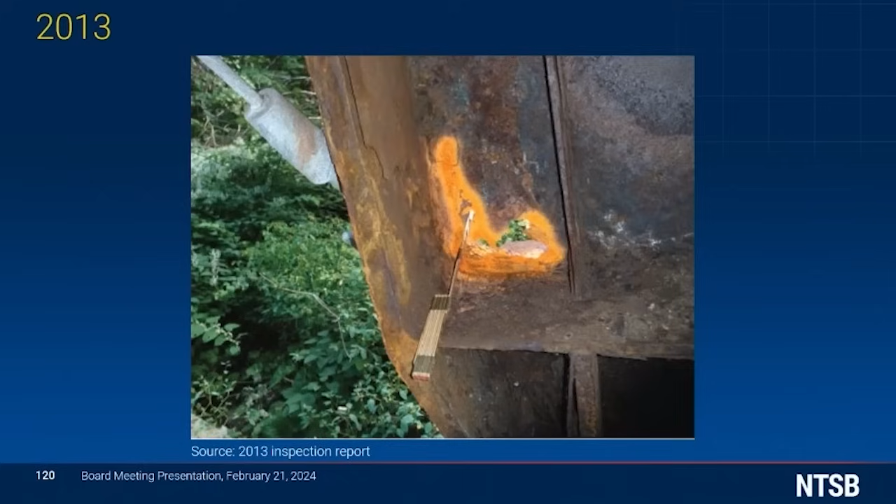Did the September 2021 inspection report recommend any immediate action? The September 2021 report did recommend that the holes and section loss be repaired, but again it was coded as priority code 2, so it would not have been required as an immediate action item.

Thank you for that. I see my time's up, so back to you, Chair. Thank you, and we'll come back again. Really great questions, I think these are important issues we get into. So thank you, Member Graham.

Member Chapman. Oh boy, I hope there's not a fire alarm. If there is, I'll come back and talk about that for a second, but go ahead. Thank you, Chair. Here in my kitchen in Bethesda, we are having no fire alarms. So, Tom gets to take over. We'll come back by mobile phone. No, I'm just kidding, go ahead.

I want to join my colleagues on the board in commending all of you for really outstanding work. I'm always so impressed by what our team does with regard to all these investigations, but this one I think is particularly impressive. Piecing this together and trying to determine what happened was quite a task, and you are to be commended for outstanding work.

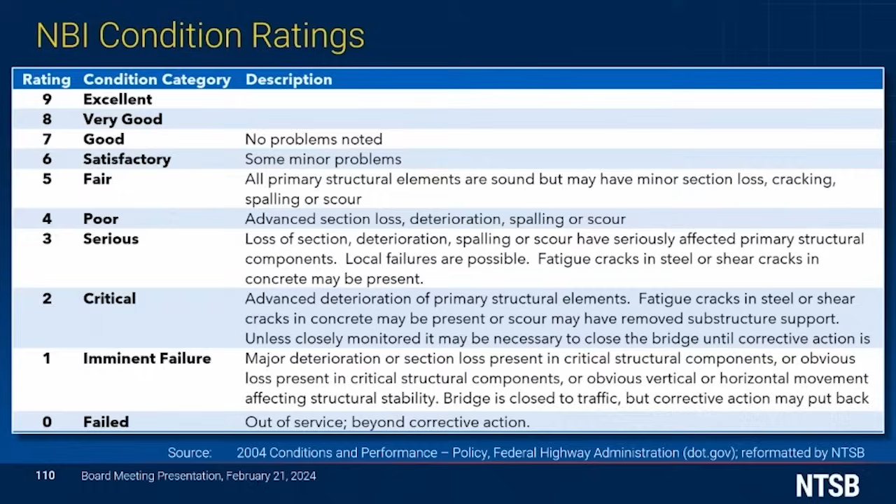Chair, I have one last question. I'll just save that for the next round. Thank you. I just want to emphasize that this round is on the maintenance. For the inspection round, that is the second round we're going to get into. So do we have any other questions on the maintenance that was, or really was not, performed on this particular bridge?

My question. Graham? Yeah, I do have some too. Great, go ahead. I appreciate the discussion a little while ago about where communities put their money and how it's used.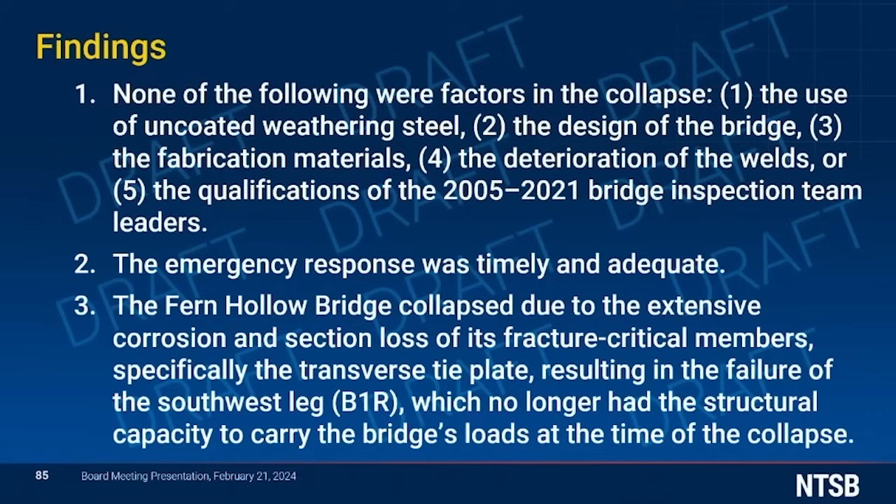Number 2, the emergency response was timely and adequate. Number 3, the Fern Hollow Bridge collapsed due to the extensive corrosion and section loss of its fracture critical members, specifically the transverse tie plate, resulting in the failure of the southwest leg, B1R, which no longer had the structural capacity to carry the bridge's loads at the time of the collapse.

Number 4, the significant corrosion and section loss on the southwest leg, B1R, resulted from the failure of the City of Pittsburgh to act on the repeated maintenance and repair recommendations documented in inspection reports from 2005 to 2021, leading to progressive deterioration and structural failure.

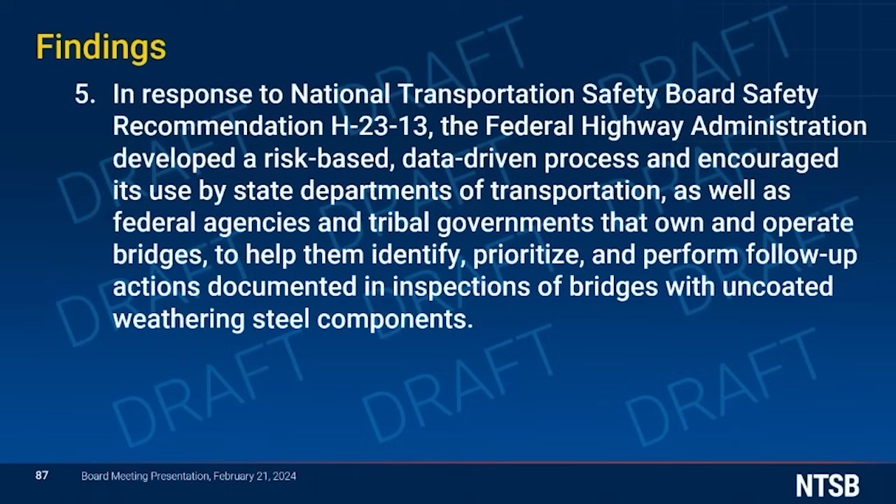Number 5, in response to National Transportation Safety Board Safety Recommendation H-23-13, the Federal Highway Administration developed a risk-based, data-driven process and encouraged its use by state departments of transportation, as well as federal agencies and tribal governments that own and operate bridges, to help them identify, prioritize, and perform follow-up actions documented in inspections of bridges with uncoated weathering steel components.

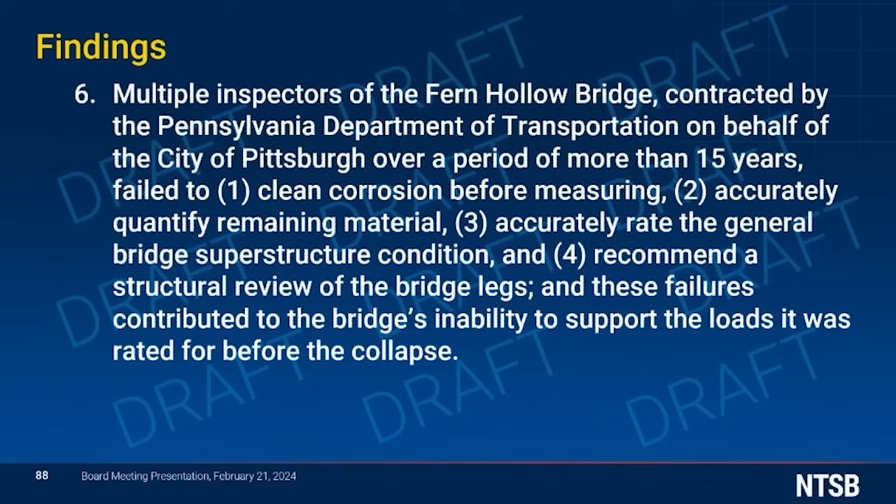Number 6, multiple inspectors of the Fern Hollow Bridge, contracted by the Pennsylvania Department of Transportation on behalf of the City of Pittsburgh over a period of more than 15 years, failed to: 1, clean corrosion before measuring; 2, accurately quantify remaining material; 3, accurately rate the general bridge superstructure condition; and 4, recommend a structural review of the bridge legs. These failures contributed to the bridge's inability to support the loads it was rated for before the collapse.

Number 7, in the fracture critical identification framing plans, the fatigue and fracture bridge inspection plan, and the handwritten notes contained in the earlier Fern Hollow Bridge inspection reports, Pennsylvania Department of Transportation contractors did not properly identify the bridge legs, including the transverse tie plates, as fracture critical members, non-redundant steel tension members, and as a result, the legs did not consistently undergo a more in-depth, hands-on fracture critical member inspection as required by 23 Code of Federal Regulations 650 Subpart C.

Number 8: had the bridge legs, including the transverse tie plates, been properly identified as fracture critical members, the inspection recommendations related to repairing and reinforcing section loss and holes in the legs would likely have been assigned a priority code of 0 and prompted action within 7 days.

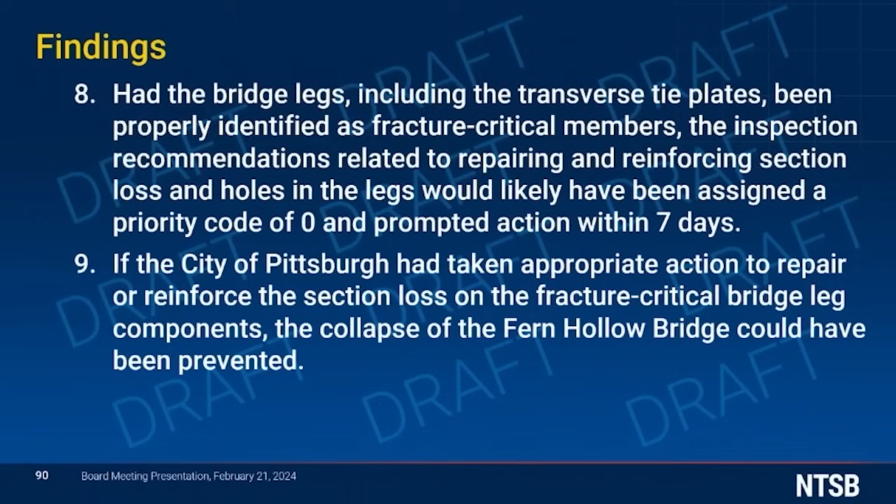Number 9: if the City of Pittsburgh had taken appropriate action to repair or reinforce the section loss on the fracture critical bridge leg components, the collapse of the Fern Hollow Bridge could have been prevented.

Number 10: the correct identification of fracture critical members is crucial to ensuring that these members are properly maintained so that they do not fail and result in a partial or full bridge collapse.

Number 11: bridge inspectors lack adequate guidance from the Federal Highway Administration Bridge Inspector's Reference Manual and the American Association of State Highway and Transportation Officials Manual for Bridge Evaluation on the proper identification of localized tension zones and tension components to correctly identify fracture critical members in preparation for and during bridge inspections.

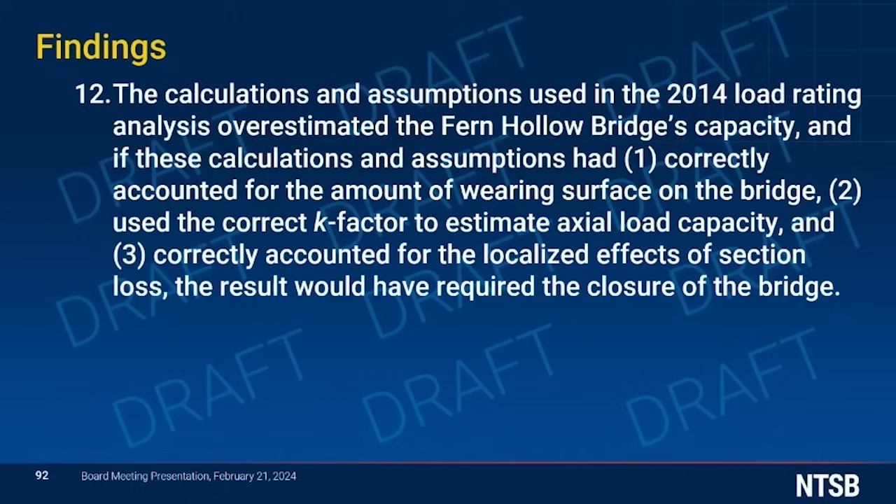Number 12: the calculations and assumptions used in the 2014 load rating analysis overestimated the Fern Hollow Bridge's capacity. If these calculations and assumptions had, one, correctly accounted for the amount of wearing surface on the bridge, two, used the correct K factor to estimate axial load capacity, and three, correctly accounted for the localized effects of section loss, the result would have required the closure of the bridge.

Number 13: the quality of the City of Pittsburgh's paving records was so poor that determinations could not be made about whether the actual asphalt wearing surface exceeded what was assumed in the design of the bridge, or about how long the wearing surface had exceeded the as-designed thickness, which contributed to an incorrect load rating analysis.

Number 14: the thickness of a bridge's wearing surface is an important component for calculating load ratings, and non-destructive techniques can provide a means of verifying the actual thickness of the wearing surface without introducing damage to the bridge.

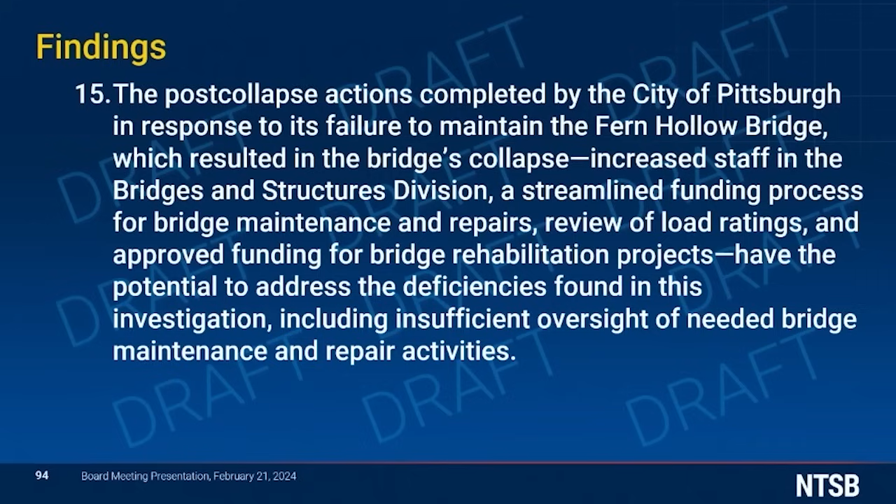Number 15: the post-collapse actions completed by the City of Pittsburgh in response to its failure to maintain the Fern Hollow Bridge, which resulted in the bridge's collapse, increased staff in the Bridges and Structures Division, a streamlined funding process for bridge maintenance and repairs, review of load ratings, and approved funding for bridge rehabilitation projects, have the potential to address the deficiencies found in this investigation, including insufficient oversight of needed bridge maintenance and repair activities.

Number 16: the Pennsylvania Department of Transportation's insufficient oversight of the City of Pittsburgh's bridge inspection program contributed to the bridge's continued deteriorated condition that led to the collapse.

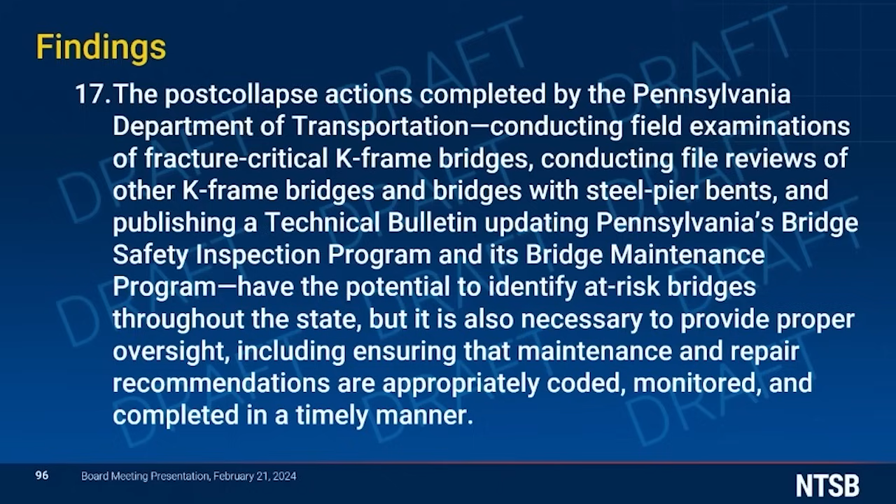Number 17: the post-collapse actions completed by the Pennsylvania Department of Transportation, conducting field examinations of fracture critical K-frame bridges, conducting file reviews of other K-frame bridges and bridges with steel pier bents, and publishing a technical bulletin updating Pennsylvania's Bridge Safety Inspection Program and its Bridge Maintenance Program, have the potential to identify at-risk bridges throughout the state, but it is also necessary to provide proper oversight, including ensuring that maintenance and repair recommendations are properly coded, monitored, and completed in a timely manner.

Number 18: the Federal Highway Administration should use data-driven reviews of targeted bridge populations to investigate specific bridge safety issues, such as the validity of load ratings of bridges with advanced deterioration.

Number 19: the Fern Hollow Bridge collapse demonstrates the consequences of failure to complete inspections in accordance with standards, failure to correctly identify fracture critical members, failure to correctly perform a load rating analysis, and failure of the bridge owner to respond to inspection findings and complete maintenance recommendations in a timely manner. Chair?

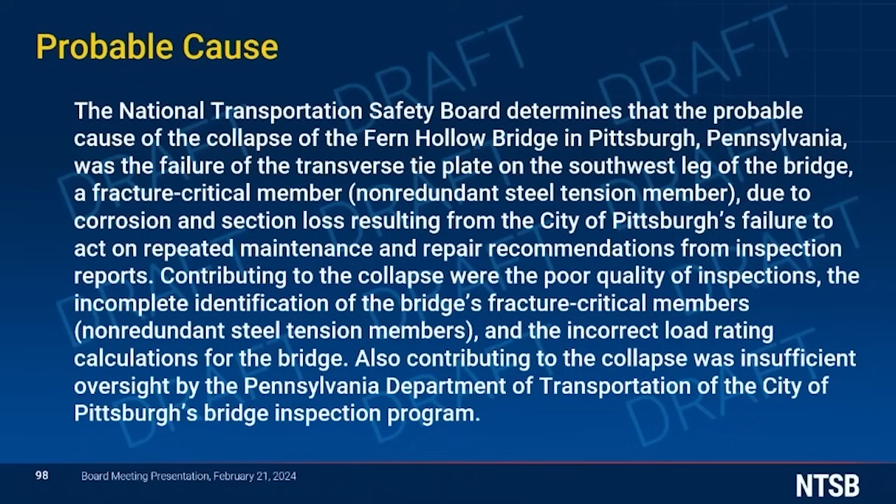Thank you so much, Mr. Curtis. Are there any amendments to the probable cause?

Do I have a motion to adopt and a second? So moved. Second. Moved by Member Chapman, seconded by Member Graham.

Council, I'll start with Member Graham. Aye. Member Chapman, aye. And Chair, aye. The vote tally is 3 in favor of adopting the probable cause. Mr. Curtis, can you read the proposed recommendations?

As a result of this investigation, staff proposes the following 11 new safety recommendations, 5 to the Federal Highway Administration.

Number 1, require state departments of transportation, as well as federal agencies and tribal communities that own and operate bridges, to conduct a one-time review of the existing fracture critical member, non-redundant steel tension member, inspection plans for bridges with non-redundant steel frame leg designs in their inventory, and update these plans as necessary to ensure that all fracture critical members, especially those in the legs, have been properly identified and accounted for in the fracture critical member inspection plans and inspections.

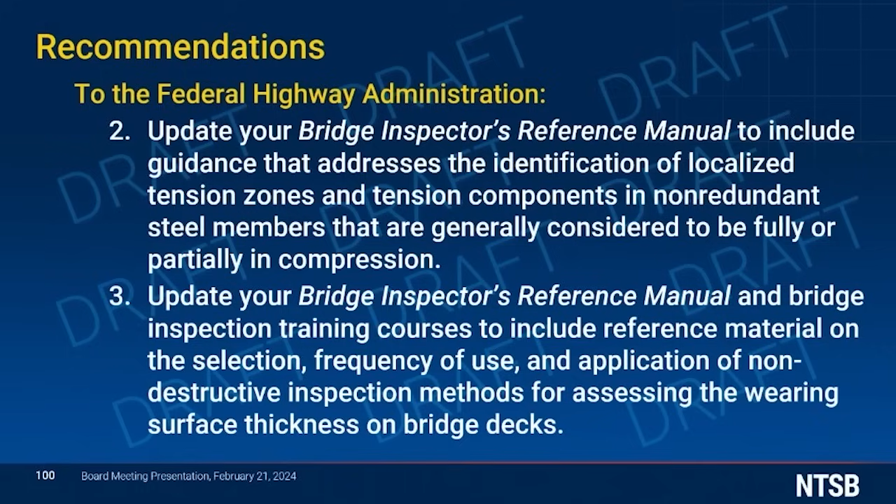Number 3, update your bridge inspector's reference manual and bridge inspection training courses to include reference material on the selection, frequency of use, and application of non-destructive inspection methods for assessing the wearing surface thickness on bridge decks.

Number 4, establish a process for conducting targeted reviews of the safety issues identified in this investigation to include, at a minimum: 1, an evaluation of bridge owners' determinations of the need to conduct new load ratings of bridges with advancing deterioration; and 2, an evaluation of inspection reports on bridges with advanced deterioration to determine if the assumptions and methods used in the load rating calculations are correct. Incorporate the results of these reviews into the National Bridge Inspection Program Compliance Review Manual as necessary.

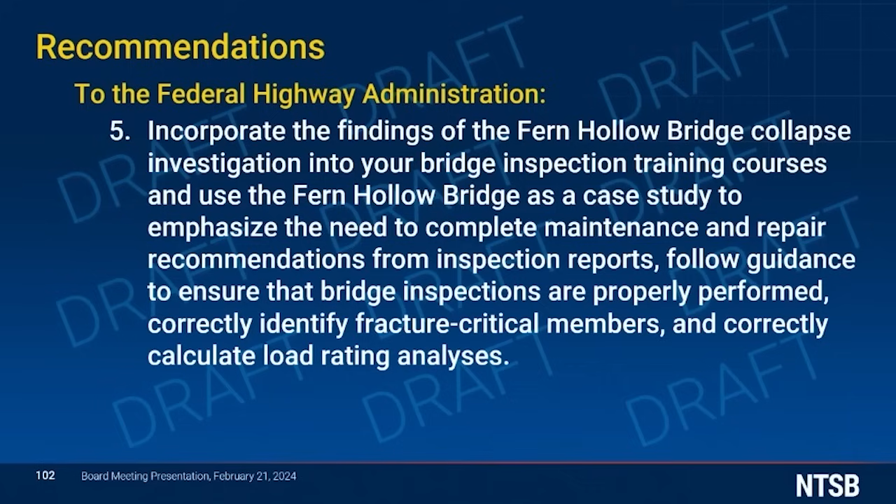Number 5, incorporate the findings of the Fern Hollow Bridge collapse investigation into your bridge inspection training courses and use the Fern Hollow Bridge as a case study to emphasize the need to complete maintenance and repair recommendations from inspection reports. Follow the guidance to ensure that bridge inspections are properly performed, correctly identify fracture critical members, and correctly calculate load rating analyses. 2 recommendations to the Pennsylvania Department of Transportation.

Number 6, work with the City of Pittsburgh to evaluate and publish a report documenting the effectiveness of the changes made by the City of Pittsburgh to ensure that bridges are safe for the traveling public. Evaluated changes should include completing necessary bridge maintenance and repair recommendations and confirming that bridges have correct load ratings that account for deterioration.

Number 7, develop and implement a plan to publish yearly aggregate data on bridge maintenance and repair recommendations to monitor completion of these recommendations. 2 recommendations to the City of Pittsburgh.

Number 8, establish a system to ensure that you maintain paving records indicating how much asphalt wearing surface is removed and how much is subsequently placed during every bridge resurfacing operation.

Number 9, in collaboration with the Pennsylvania Department of Transportation, evaluate the effectiveness of the changes made by the City of Pittsburgh to ensure that bridges are safe for the traveling public. Evaluated changes should include completing necessary bridge maintenance and repair recommendations and confirming that bridges have correct load ratings that account for deterioration. 2 recommendations to the American Association of State Highway and Transportation Officials.

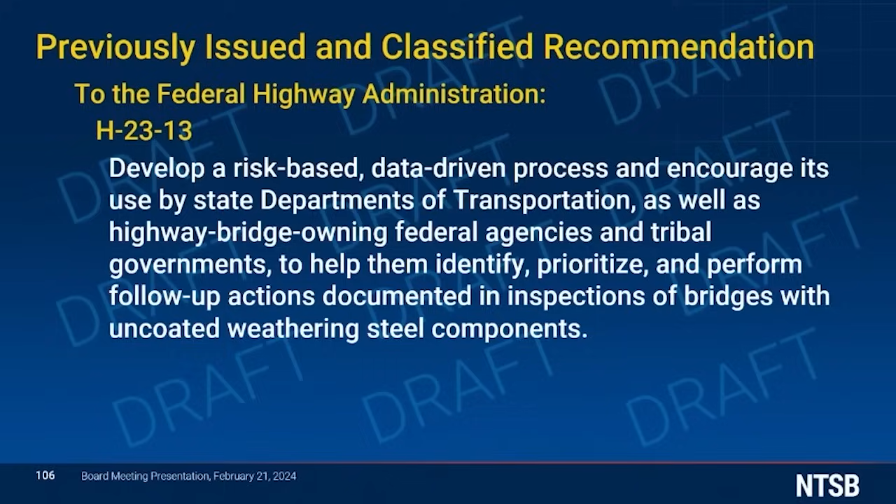Safety recommendation H-23-13 is classified closed acceptable action in section 2.3 of this report. Thank you very much. Are there any amendments to the proposed recommendations?

Not for me, nope, thanks. I have two amendments.

Mr. Curtis, could you pull up recommendation number 6? Or whoever is working the document. Okay, so the first one is to recommendation number 6.

There was some confusion about who would lead the effort to evaluate and publish a report documenting the effectiveness of the changes made by the City of Pittsburgh to ensure that bridges are safe for the traveling public. Pennsylvania DOT has the oversight authority, so we want to make that very clear. Staff had suggested language.

Originally, there was different language provided by highways than provided by safety rec. So I think we should make sure that the Office of Highway Safety is satisfied with the recommendation. But my amendment right now would strike 'work with the City of Pittsburgh to' and insert 'lead the effort.' So it would now read: to the Pennsylvania Department of Transportation, lead the effort to evaluate and publish a report, and the rest would be the same.

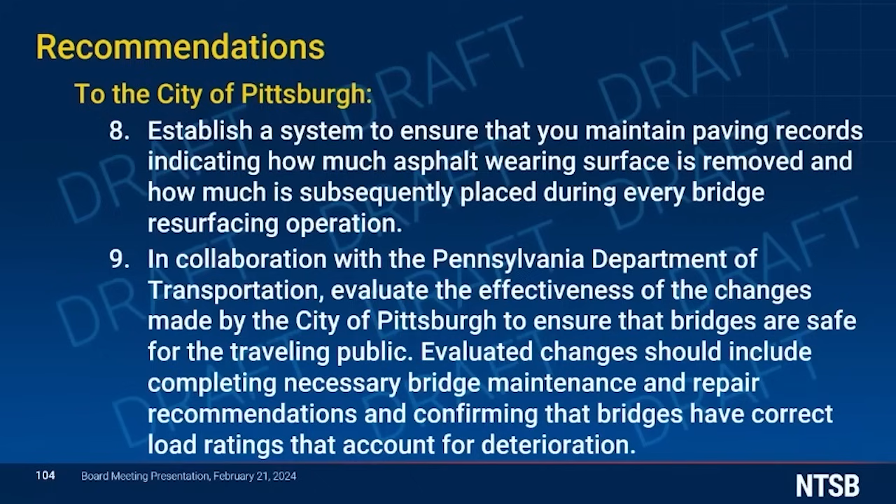I will turn to staff, but I don't have anything more here, but first, anything from Member Graham, or is there a second? Second, I think Mike actually whispered second, so we'll go with that, Member Graham. You're on mute, you're muted, Mike. Sorry, I second that. Okay, thank you.

Any conversation about it or go to staff? Okay, Ms. Poland? Yeah, staff is fine with this. We think it's an equivalent change, so that goes along with the first amendment, and we're fine with that. Great, thank you so much, and thank you for clarifying these.

We will go ahead and vote on the two amendments, the amendment to recommendation 6 and the amendment to recommendation number 9. Council? Yes, ma'am. Members, as usual, if in favor, say aye, and if opposed, say no. Starting with Member Graham. Aye. Member Chapman. Aye. And Chair Homendy. Aye. All right, Chair, the tally is 3 in favor of adopting the amendments proposed to recommendations number 6 and 9. Any further amendments to the recommendations?

No. And so we should, since we just adopted the amendments, vote on the entire proposed recommendation package. Council, all right, members, again. So is there a motion and a second on that? So moved. Second. Moved by Member Chapman, seconded by Member Graham.